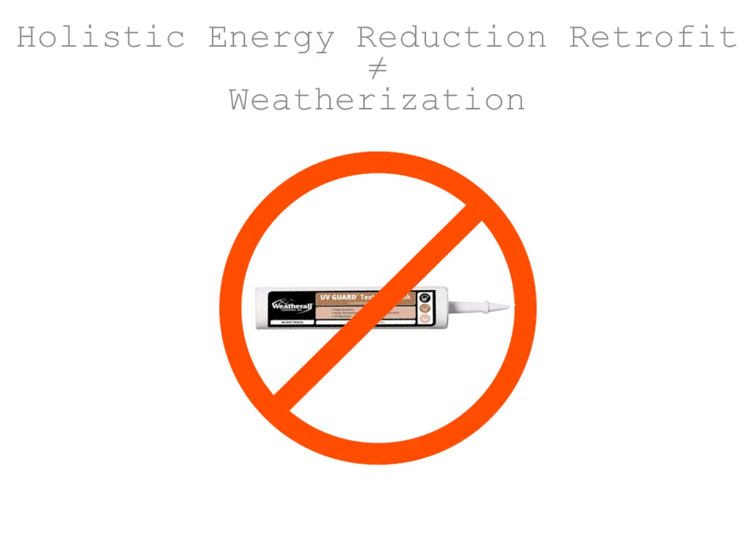And the good news here is that that can actually be done, partially because of the way that buildings are constructed here. Wood construction is great; it can be modified very easily and by just about anybody. So we can do a lot with wood construction.

The other good news is that other people have tried, and there's many concepts out there that you can ladder up to and leverage, passive house being one of them. So this is not out of the question. It's just a matter of whether you choose to do that, and whether you can actually afford to do that.

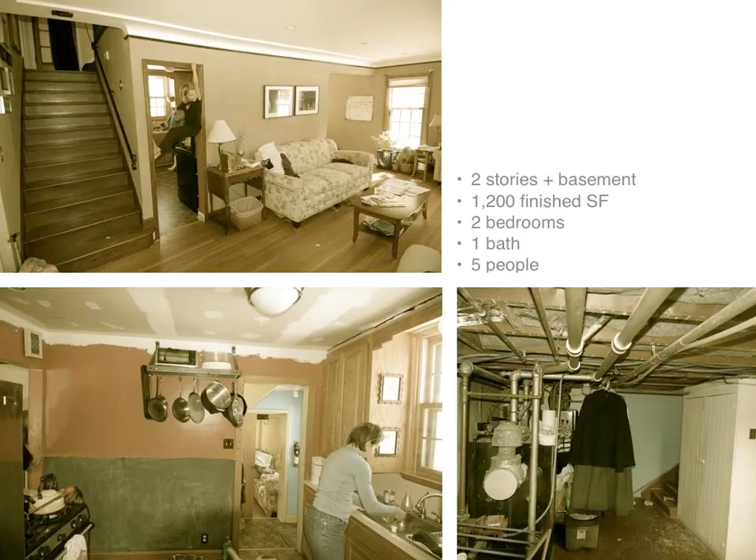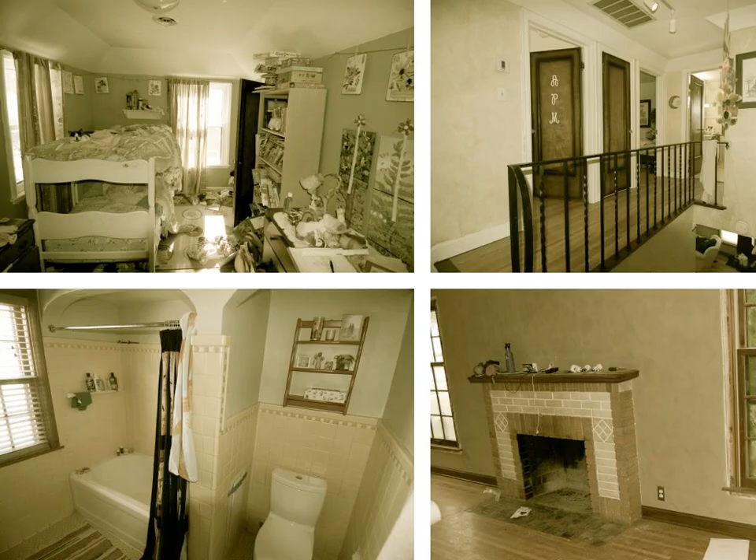You can see in the second slide to the right up above the railing, which doesn't just appear low, it was low. There were many code issues in this building, this being one of them. Standing next to that gave me kind of a buzz. It was about knee high or so. Bathroom, the only bathroom in the house on the 2nd floor, which is a minor inconvenience, I suppose. And also with outside walls. And so that bathroom was not only small and in a bad location, but it was also very, very cold in the winter.

And then the fireplace that I'm showing here is sort of indicative, again, of its age. That would have been maybe used to heat the house at some point. We don't know. At this point, however, it was terribly drafty, going the wrong way, backdrafting. So the whole house reeked of soot. And that was really prevalent depending on changing weather conditions. It would backdraft through that quite a bit. And we blame some of that on the airport noise reduction retrofit the building got in the, I want to say late 80s, maybe 90s, not so sure. That retrofit really produced some bigger problems for this building.

I should say that a retrofit like this was obviously targeting an improvement, so that it would be quieter in the building. What they did when they retrofitted is they added storm windows to the outside, single pane. So the window system was single pane, double hung with single pane storm window. So not necessarily a high performance assembly. And when they put that in, they didn't really worry about air tightness. These IR pictures here really showcase that well. The darker the color, the lower the temperature, and you can see the bypasses and the lack of performance in the glazing.

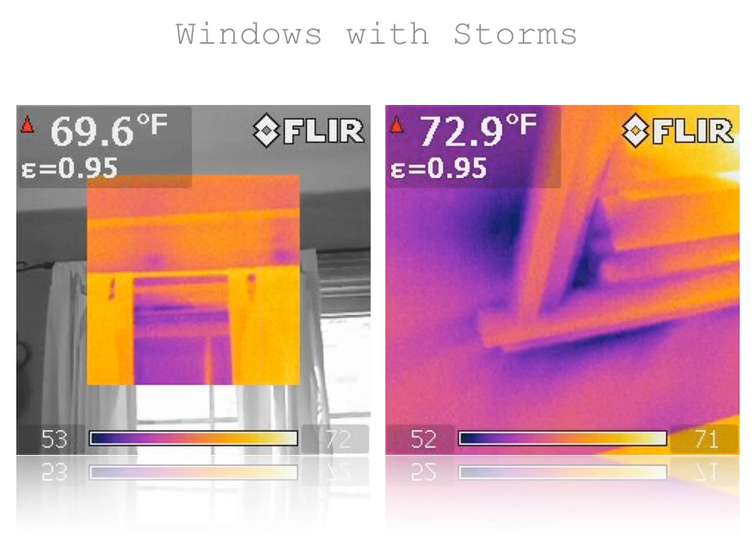The other thing that we found when we went in early is that the interior surface of exterior walls was actually at the freezing point while the house was being heated. So we had about 36-degree wall temperature in a house that's being heated. The mechanical plant had a hard time getting above 64 degrees in that building. That was hard. I don't know that it would have ever gotten up to 70 in there. We tried, and 64 is about as warm as we saw it. The basement air temperature was maybe 50 degrees. And this is all conditioned interior space for people.

We did manage to get a blower door test from this building, and that's where it came in at 8.5 air changes an hour at 50 Pascal, 2100 CFM. For those of you in the trade, that probably means something. It's not as terrible as some buildings we've tested, and that's probably due to the fact that it had the noise pollution retrofit, but it's pretty leaky.

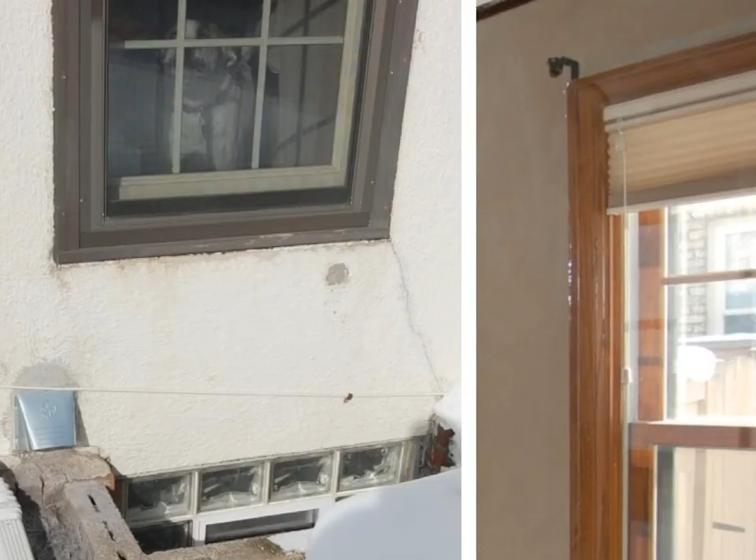And when we go in, not just doctors, but architects too, we deal with pre-existing conditions. We try to scrutinize buildings fairly closely. And so we did the same thing here. And you can see a few of them, some of the highlights. You may notice the dryer vent in this image essentially blowing onto a retaining wall. This by itself is not terrible. It's just not right.

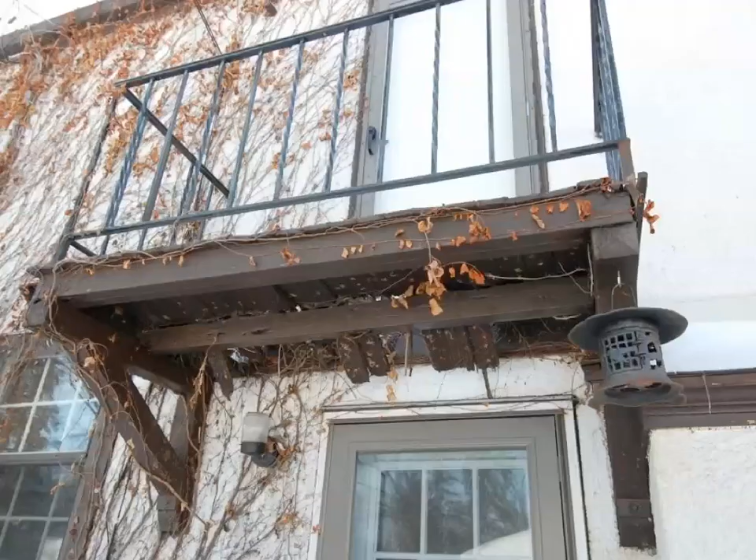You can also see the stucco cracking all around the windows there, and that's indicative, of course, of a weather barrier failing. On the inside, oops, skip the slide here. No, I'm sorry. The right-hand side there, you can see the plastic that people put on the windows, and that's pretty common around here. And there's nothing wrong with that.

But the problem with the window wasn't so much that it was leaking through the window, but it was leaking around the window. So the fact that there was plastic on the window didn't really help because most of the air was leaking around the window and through the window trim. And so this really produced a minor improvement. Here's another image of the second floor balcony, and I think structurally that speaks for itself.

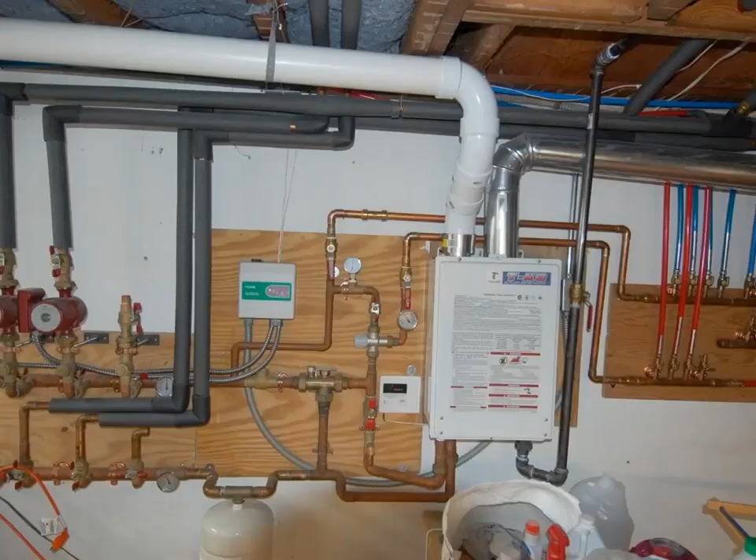Here's the mechanical system, and I have to say this was taken on by the homeowner himself. He put in this new system with an on-demand boiler, and there were some code challenges between this thing heating the home and making hot water, where this wasn't actually a code legal system. I don't know if that had anything to do with the lack of performance, but at the end of the day, it was clear that we would recycle that or change it anyway.

So it wasn't one of our concerns, but mechanical systems we find in these buildings, they vary greatly. This was certainly a newer setup, but that didn't mean that it worked very well. And in some cases, we find very, very old equipment that doesn't work at all.

So at the end of all that, we got to take a tally of where we are. And what we did here is we have sort of a checklist. We like lists. We're German, so that always works for us. We have structure, yes, and the structure held up for all these years. Weather barrier, maybe. Stucco was on there. We had windows that would open and close, but how good they were, who knows.

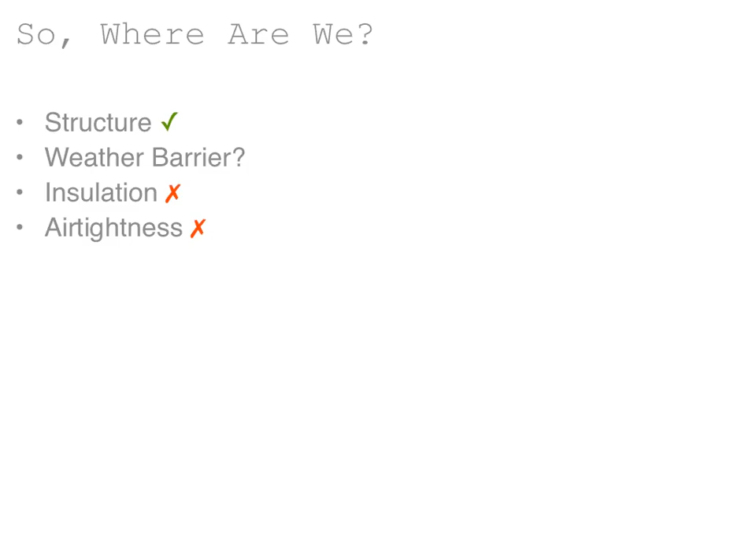Insulation, no. We did find a little bit, I think, in one corner of the house, which was sort of odd. One room was insulated, the rest was not. And then any other insulation in the basement, for instance, was put there by the homeowner just recently. So no insulation. Air tightness, I think at 8.5, it's fair to say there wasn't any air tightness.

Moisture management, well, interestingly enough, in these older structures, that sort of works, right? Because they're leaky, they're drafty, we got wood construction, and so it sits wet, and then it warms up outside eventually, and it can dry out, and if there's no insulation in the cavity, that moisture isn't really being absorbed and stored. So the building held up, no doubt.

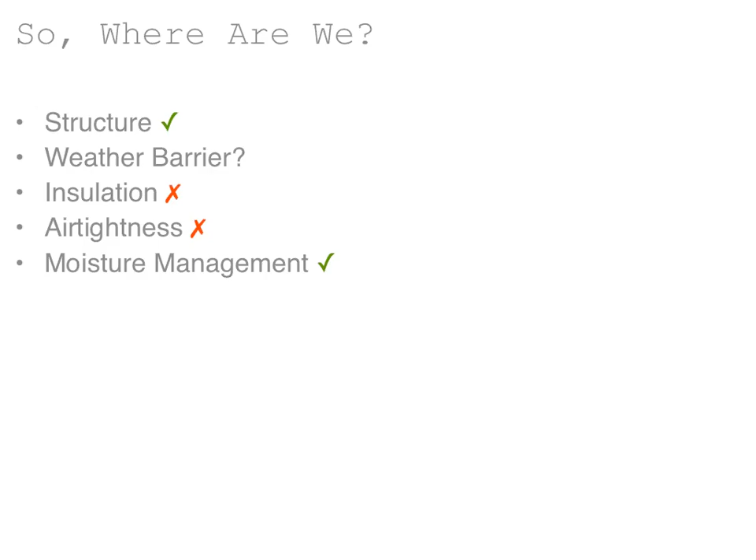'35 to 2010, whatever that is now, so many years it held up. And it didn't fall down, so that worked. And it's beyond its design life, because we assume wood construction is a 30-year life cycle. Ventilation and air quality, not. We had the backdrafting issue I talked about. There were no means of exchanging air in the building, no mechanical system to do that. So that was poor.

Comfort, I gave that a 2 no's, because that was really terrible. I had enough of it after a day of measuring. Daylight, very little, and that is due to the design of the building, really. You saw most of the windows are kind of small, and that's really how they were designed back in the day. So it's not really a flaw, it's just a fact.

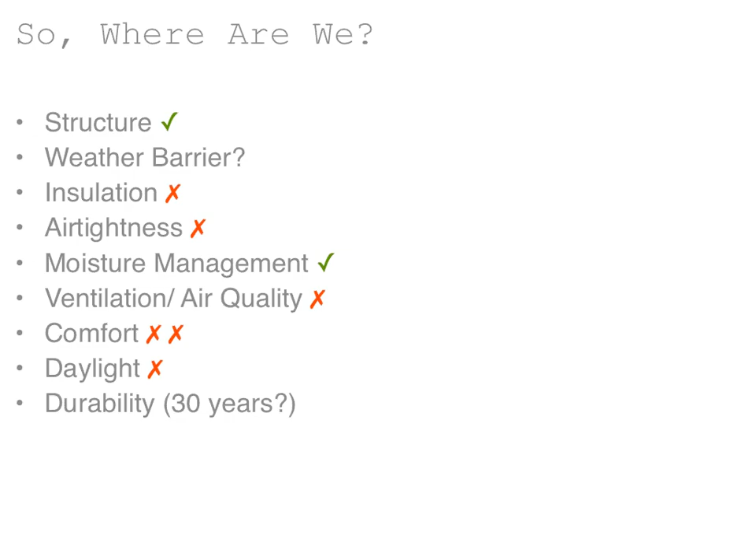No great daylighting. Durability, we assume wood construction is a 30-year product unless you do something special with it. We all recognize these buildings continue to live on way longer than that, but that's because we maintain them and heavily retrofit them every so often. Design was a sign of the times. You can think of that what you want. It is what it is. It fit the neighborhood, and that's okay.

And so then the next question was, now that we know all that, where do we go? What do we do with that information? Here's another list. I think there's 2 more in the slideshow, so bear with me. We call this the laundry list because it could be endless. And we developed this with the homeowners, I should say, too. It's not just us doing our work here, but in this case, the Brazeltons were, of course, heavily involved.

What we needed to find in that building were 3 more bedrooms, 2 more bathrooms, a mudroom, a better kitchen, better living areas, a homeschool room, safe stairs, a weather-tight envelope, a durable structure, healthy interiors, comfort in daylight, low operating cost, and energy performance.

Okay, that was the list that the homeowners brought to us, and we essentially brought back the EnerPHit as a tool to counteract some of the shortcomings here and guarantee a certain level of performance. But everything else you see on that list is really standard architectural practice, trying to find the rooms and improve on some of the conditions. So it's a mixture of both.

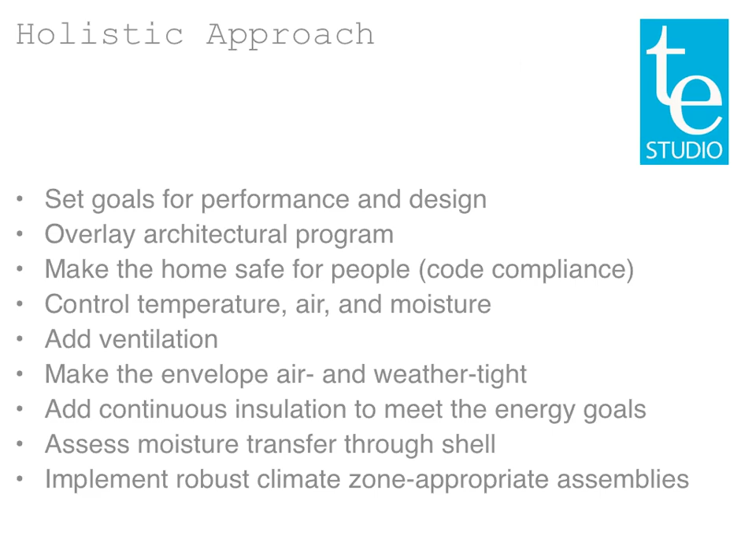And then last but not least, implement robust climate zone appropriate assemblies. So we want to choose materials and systems that we feel will survive the onslaught of what this climate zone here has to offer. And it's one of the more exciting places to build in the world.

So, all right, energy targets, just a simple one here. Reduce loads and air leakage. That's pretty straightforward. We're aiming to reduce the heating load by about 80%. You saw in that little film earlier, if you build a new passive house, it's about a 90% reduction. Again, in a retrofit, they give you a little bit more leeway, so it'll be about 80%.

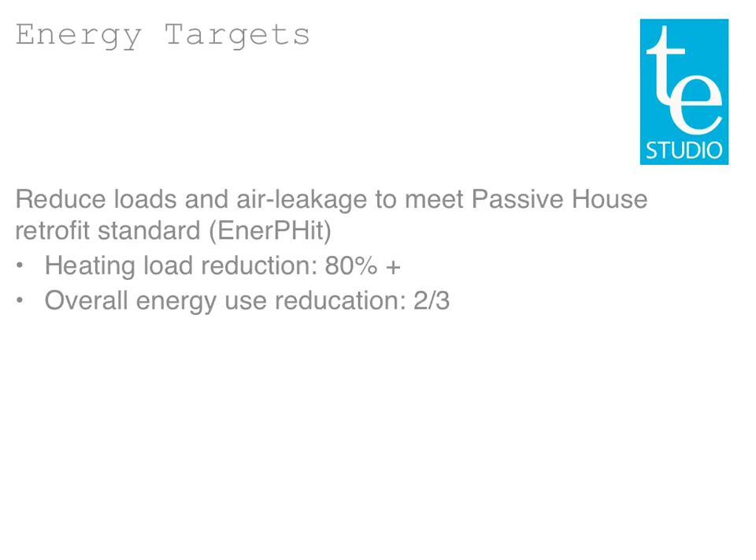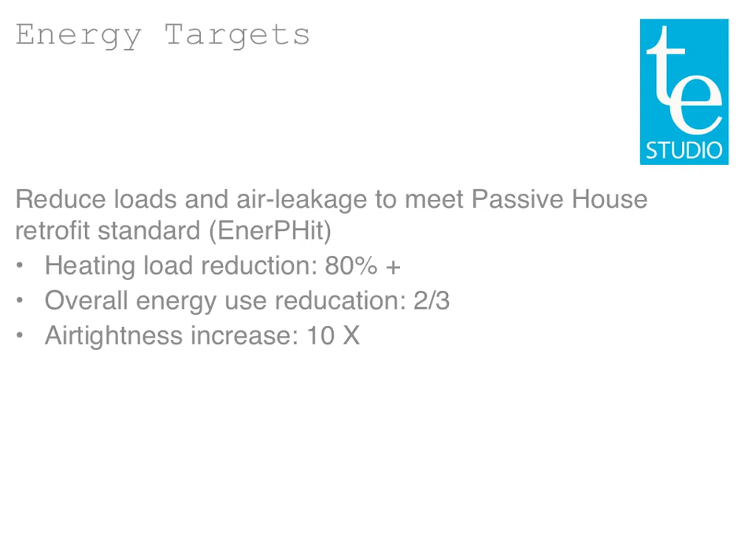Overall energy consumption in the building cut by about 2/3. We can't do that without the help of the homeowner. That's important, because their usage pattern in the building will affect that. But that's usually what a passive house brings. And air tightness in this case, because we knew what it was before and what it needs to be, we needed a 10-fold increase in that. And that's how we did it right there. And we're done.

So, for those of you who live in Minnesota, you wouldn't go outside in the winter with just a t-shirt, right? So you put a heavy coat on. And to everybody, that makes perfect sense. If you go out in the winter, you want to stay warm, you need that heavy coat. And that's really the concept that passive solar design and especially passive house has pioneered over the last 20, 30 years: in those colder climates, put a heavy coat on the building.

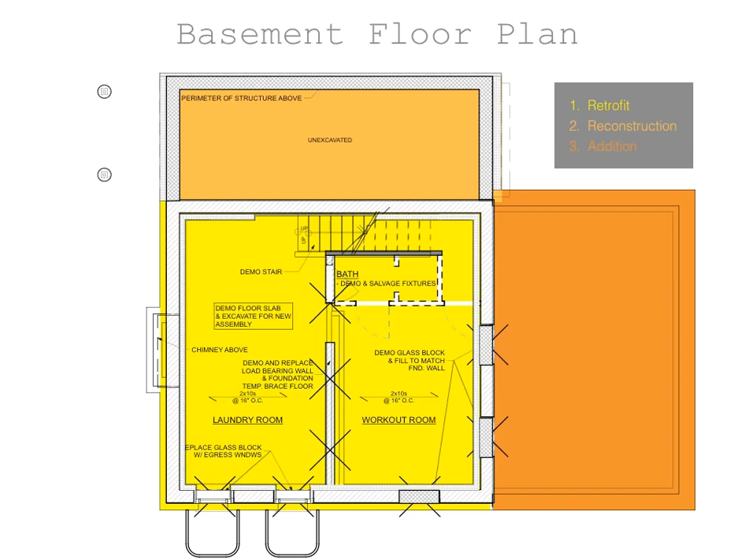And I'll overlay here now how we retrofit it. You can see the main body of the house was retrofit. The north side of the house ended up being what we called reconstruction, and you'll see that in later slides. It was so badly damaged over the years that it had to be rebuilt. And then on the east side, we ended up building an addition because we did need to find a few more square feet. So technically speaking, we have three parts to this project.

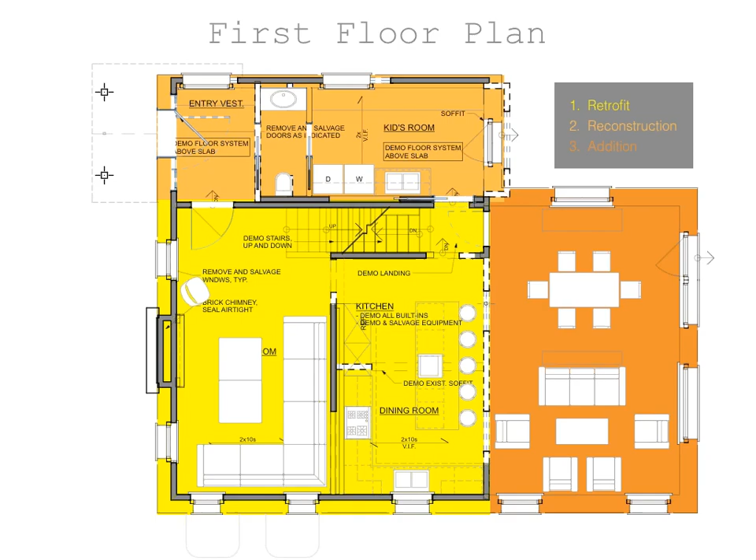I'm not sure that we need to go into every one of them, but in the retrofit area, we reshuffled kitchen, dining, and living. In the reconstruction area, we created a powder bath on the first floor, a good entry, and a mudroom. That used to be a kid's room where it says up there in the corner. It's now a mudroom. And on the addition side, we created an open kitchen and a dining living area.

Here's the final product. This is probably the better slide. So you can see it's an open floor plan, which is what most clients want these days. That has nothing to do with passive house or passive house retrofitting. This is the architectural component here.

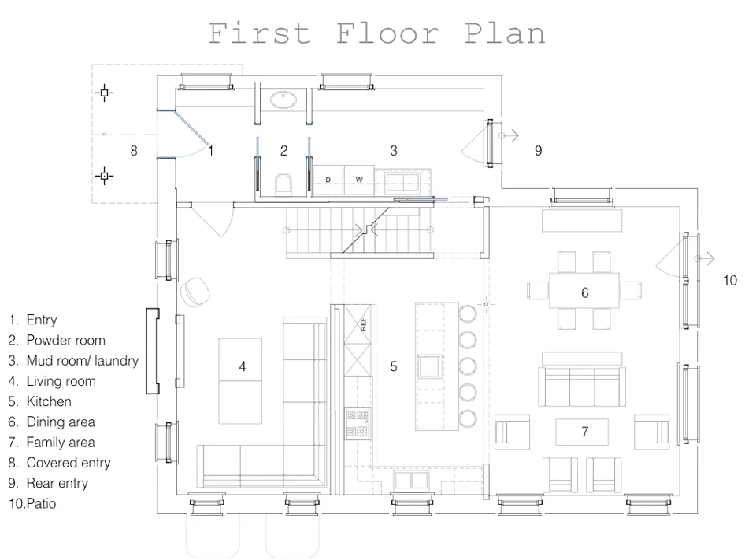The addition had a footprint of a total of 800 square feet on 2 levels, so 400 feet we added on the first floor and the second floor. Second floor plan, you can see there's the 2 bedrooms, the stair in the middle, the single bath, and then the office that I showed you. And the office was sort of almost a half a flight of stairs down.

The stair was really bad, didn't meet code, and the second floor wasn't all on one level, which presented its own challenges in retrofitting. Here's the overlay. Again, retrofit portion, reconstruction portion, and the addition portion. And then I'll jump to the finished product, and you can see we went from 2 bedrooms to now 4 bedrooms on the second floor.

We added a master bathroom in the master suite, your lower right-hand corner, and a little entry area that is sort of a walk-through closet, if you wish. And we expanded on the existing bath and separated out a toilet room. And the hope here was to just give the home better flow. With 3 kids, they can now separate out between toilet and usage of the bathroom. They have 2 vanities in there.

They're all girls. That'll be interesting in a few years, but we'll see how it goes.

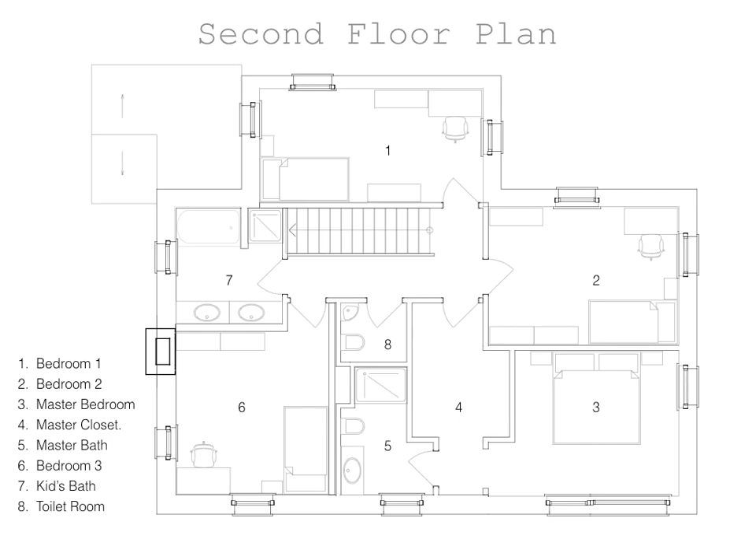So this is the floor plan and footprint that we ended up with. This is our concept sketch that we use when we talk to clients and when we give presentations like the one today. Basically, what we're looking at here is a generic section of a building. This could be any home, really. The part on the right is an illustration of what we normally find. And it's pretty similar to what we found here.

You find below-grade assemblies with no insulation whatsoever, skinny above-grade assemblies with some insulation, and usually there's a little bit in the attic or in the roof up top. But that's pretty common. And then there's a large mechanical system that's trying to make up the difference, because a mechanical system is really an equalizer, right? You're trying to maintain a certain condition, and if you can't maintain it all on its own, then you have to generate that, and that's what that system does.

Now, the change over here to the left-hand side illustrates we're adding to the existing assemblies. We're adding more insulation, all the yellow stuff. You may also notice there's sort of a fine red line in that assembly, and that means we're adding air tightness. There is a distinct layer that we identify somewhere in that system that does nothing but maintain air tightness in the building. And we figure out where that is, and we show it on all the drawings, and we educate everybody on the job site that that's the part of the building that you need to be careful with in execution and not damage.

We bank on a little bit of solar heat gain. Passive house at the core is a solar model. Now in a retrofit, we can't site the building anymore. It's already there. We also can't pick the neighbors. And so it is what it is. But even in a retrofit condition, you can bank on some solar heat gains. So we have that in the mix. We have assemblies that are conducive to it. So the windows we use are high performance products that insulate well, but allow that solar heat gain to come in. And that's the same we used here.

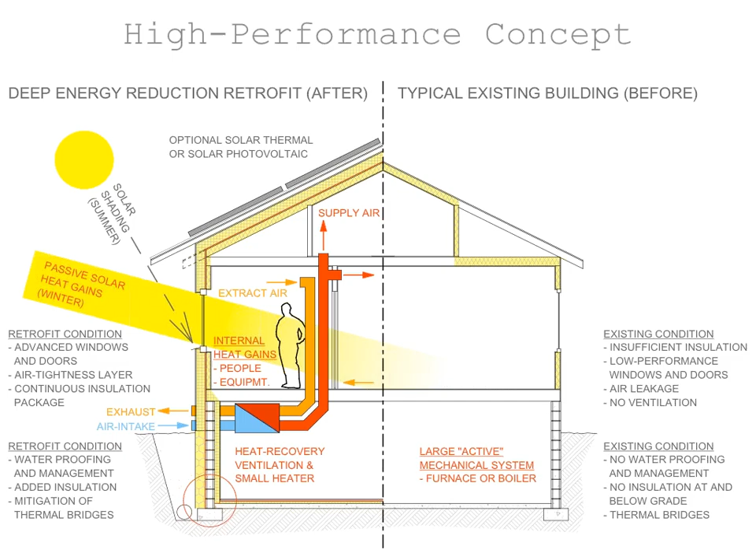These are some of the assemblies that we used. I know these are technical drawings. They don't work for everybody, but you're looking at a horizontal section on your left and a vertical section from basement to the top on the right. The colorless assemblies, or assemblies that don't have a background color, are the ones that were there.

So if you look at the right-hand side, you can see the big concrete basement wall on the bottom there and a footing, and those things were obviously there. And there's a floor system above that was there, and there is a 2x4 wall system above that was there. So everything that has color are things that were added.

In this particular case, we had the added challenge that the roof was structurally not sound, and it also started right on top of the windows. And that presented its own challenges structurally. And pretty early on, we found that that wasn't sustainable. We had to do a new roof.

And we used the opportunity to build the walls up to a regular ceiling height on the second floor, which previously it didn't have. So you can see a little bit of a knee wall basically extruding above the existing wall. It's a truss roof system up there, so that's pretty standard construction. You can just see the higher levels of insulation.

I'll give you a few figures just to put things in perspective. Had we built this to Minnesota building code, below grade or in the ground, the Minnesota code would have required an R value of 10. To make the energy goals here, we're above R30, so about 3 times the insulation value. Above grade, again, code requires about an R19.

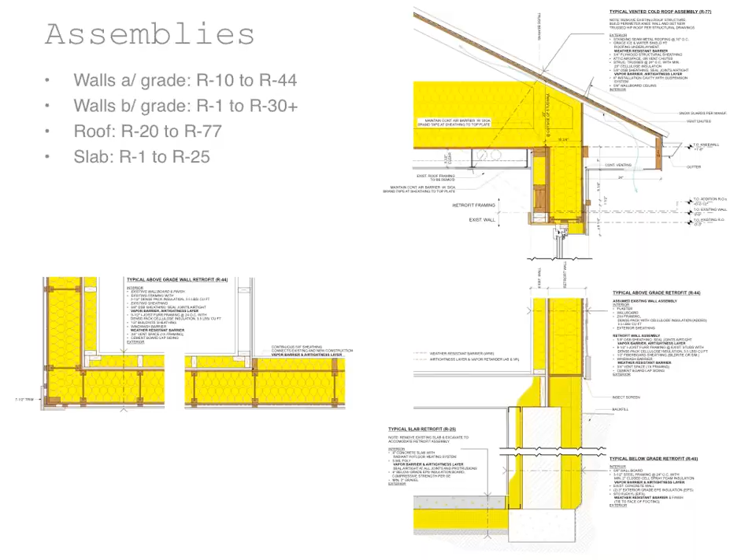And when you're getting into a retrofit like that, and Ryan, who was the builder for this project, is in the room, and he'll join us later for Q&A, this is where the rubber meets the road, in the design and execution of these details. When you want to get to these air tightness levels we talked about, and moisture management and durability, it's critical that these assemblies are designed properly and executed properly. And it takes a very diligent builder to see that through all the way to a successful blower door test, which is one of the main testing methods at the end of construction to see if it all worked.

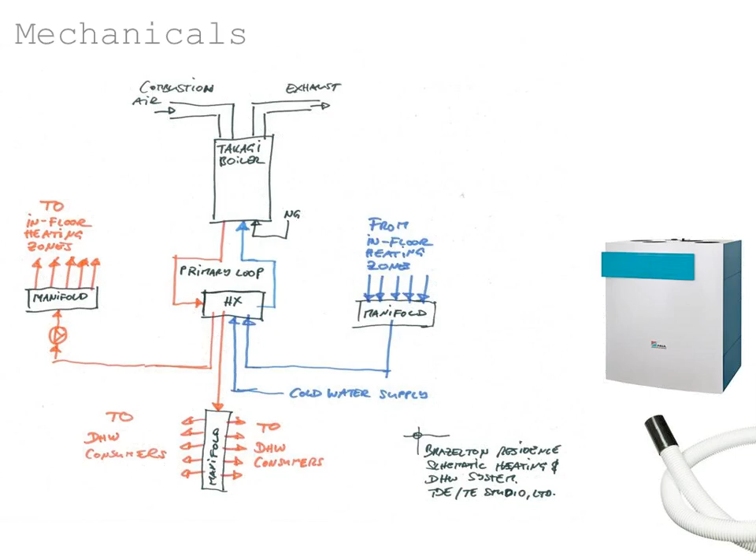And on the right-hand side, you can see the ventilation machine in a schematic and a pipe that we use for ventilation. And we have some of these products here, so we can break them out later and you can touch them and see them. So that in itself really constitutes the extent of the retrofit.

The building was designed, I should say, with a mini split air conditioner in mind. The clients haven't put that in yet, but for the design, it is vital to have it, partially because they didn't shade the windows the way that they maybe should be shaded, so they'll take on a little bit more heat gain.

But also, one of the things that we learned, and this is a good sort of message, I think, for anybody working on passive house projects: if you're dealing with an airtight, highly insulated envelope, you can heat it very effectively with your activities inside. And just like in the movie earlier where the woman said, you know, I can walk up and down the stairs and create heat in the home, it's true. And so if you had a party and you invited a bunch of your best friends and you did some heavy cooking, you will increase the interior temperature in a passive house.

And in this particular building, we were there last week. Ryan was there with us. We did a blower door test. There were about 5 of us in the building. It was all sealed off. It was a warm day. We started at 76 degrees, but inside, by the time we left, it was 78 degrees. So just 5-6 people working inside the building were able to heat it.

So an active cooling source helps you deal with those internal gains when you have those moments where that becomes excessive, but they also help you with heat gain you may take on from the sun. That may seem wasteful, but it really isn't, because in the larger scheme of things, those loads are tiny compared to what we have in heating loads. And again, we're averaging heating and cooling loads. Both of those have to meet the same standard over the course of the year, and that is not a challenge, at least in our climate zone.

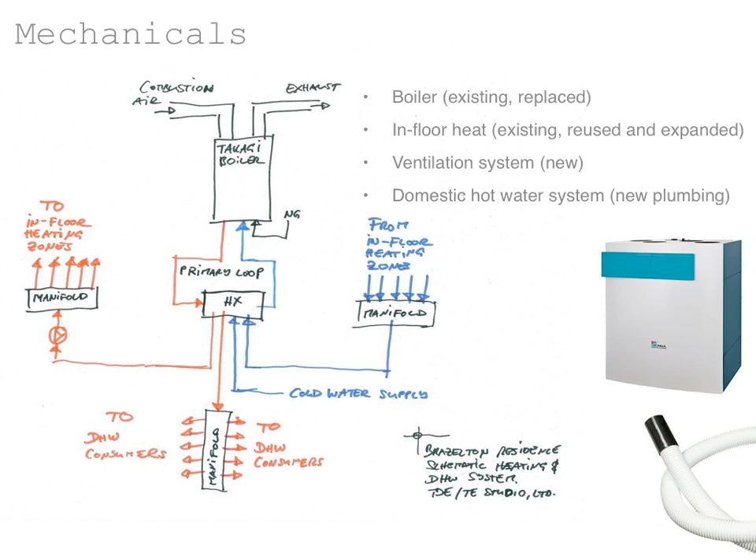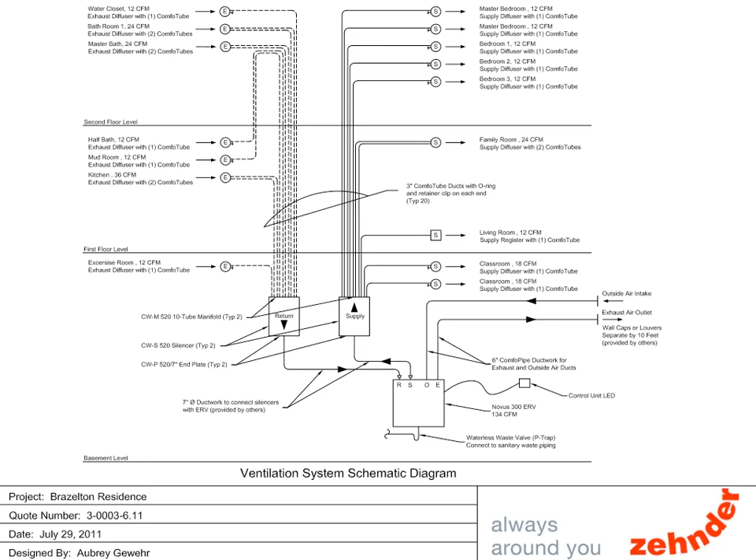All right, so let's have some fun with it. That's great. Who said oh?

So when you dig into an older building, it's the proverbial can of worms, obviously, and so was this one. This was no different. So what we found was the chimney that gave the home a lot of character was actually highly unstable. Part of it had already collapsed inside, and that was maybe also a part of why it backdrafted, because there were bypasses. I don't know. So it ended up coming off the building.

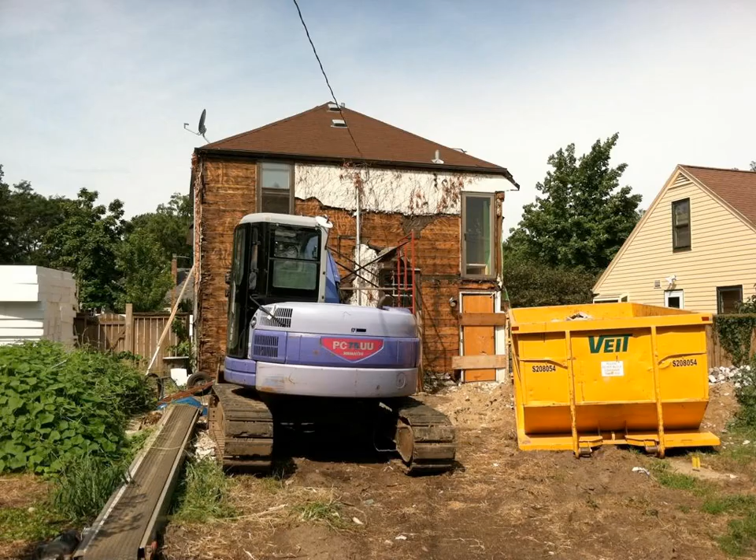And before we get too far into this, I have to say that a lot of credit on this really goes to not just Ryan, who's with us here, who's a contractor, but especially the homeowners. Desiree and Paul Brazelton, they did a lot of this work themselves. And I know they had help from family and sometimes neighbors, and I don't know, maybe even random passersby.

I think this job was much more monumental than they had ever imagined. And just picking the stucco off the house, I think they had this fantasy of you hit it with a hammer and it falls off. And I think it came off in dime-sized pieces in reality. So that was a very different equation.

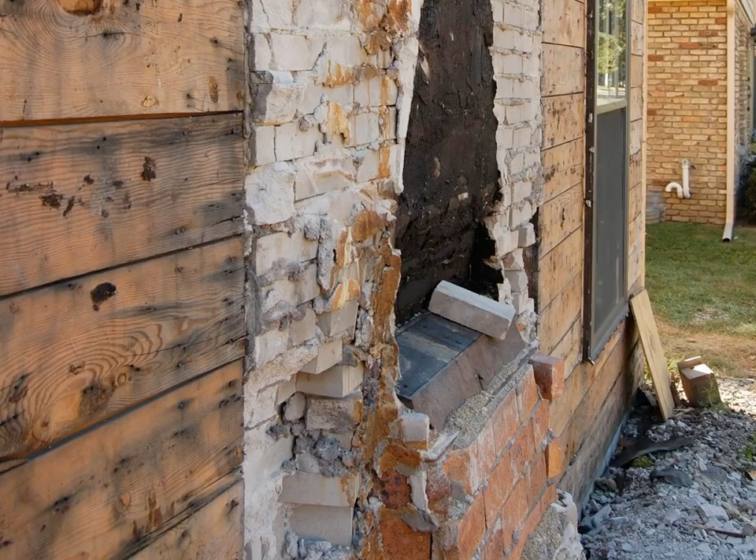Here's another close-up of the chimney. And at the end of the day, what we ended up doing is we basically layered our air tightness layer all the way across the chimney. And the chimney that you saw in the rendering before and that you'll see in the final product is completely fake. And its only purpose in life is to give that home street appeal. That's it. So keep that in mind. That home no longer has a functioning fireplace.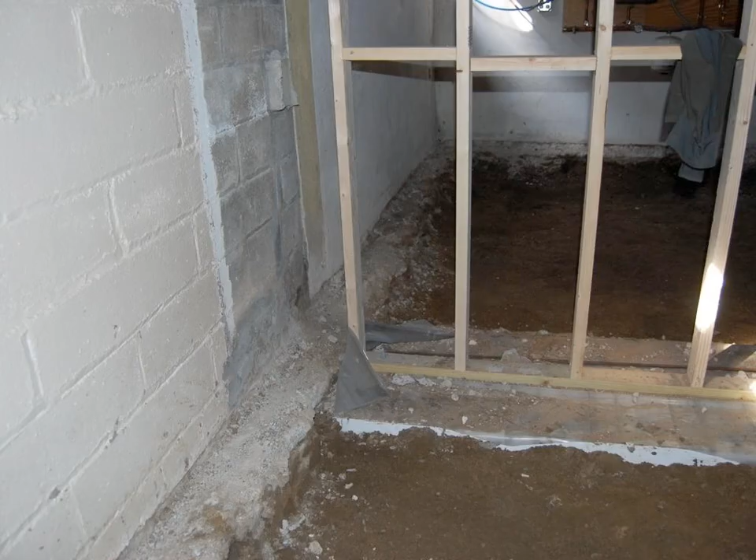I'll show you a couple of shots here of the basement and how the retrofit in the basement worked. I don't have any of the real good action pictures, so I should ask for those. But in this picture, the slab down below is already gone. So you never quite know with these older homes if they have footings, what's happening at the slab. And we identified that by busting a couple of holes.

And one of the things that we identified with the homeowner is we really need that square footage down there. They needed that space desperately. So early on, we made the decision, this is now inside of the conditioned building envelope. And what that means is it needs the same insulation levels really as everything else. And so the first order of events here was to eliminate the basement slab.

Now, a lot of these older slabs are not very thick, and I'm not sure how bad this one was to get out. But that's usually something that can get done quickly, especially if you have access to the outside, a conveyor belt or something to get rid of the garbage. I don't know that was possible here. I remember people bringing buckets up and down a ladder, which I'm sure was great fun.

Yeah. We found another opportunity here. We actually found the homeowners a few square feet. You can see that framing in the middle here, and that's the center load-bearing wall. That used to be a concrete wall. Now, there were two problems with that. It was sitting on the slab, which needed to go, and it sucked up a lot of space. And so that would have presented a significant thermal bridge had we left it in place.

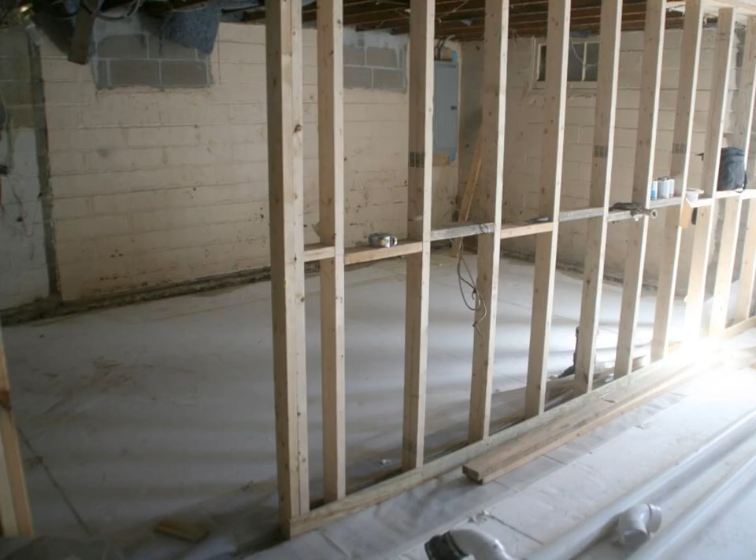And then in the next stage here, you can see how on either side of it, now the ground is being excavated and replaced with foam. The white stuff on the upper side here is EPS foam. So we're basically replacing dirt with insulation. Here's another slide, sort of a progress now. Now the entire surface is filled in, side to side, wall to wall.

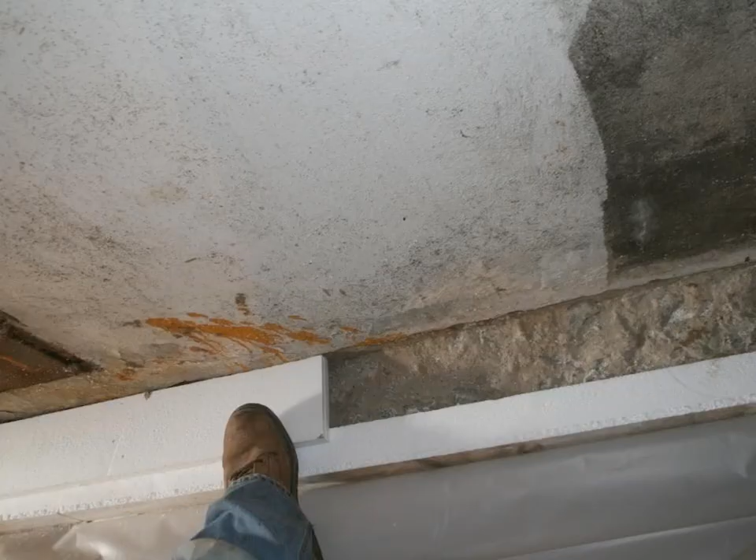Then we have air tightness that we need to maintain. So we introduce a poly membrane in this particular case. And we were also going to heat the slab just like all the other floors in the house. So you can see the heating pipes. And at the foundation, and at the perimeter, we had to get really fancy with smaller pieces of insulation to essentially encase the footing itself and disconnect it thermally from the new slab. And that's what that looks like.

And at some point, you end up with skinnier pieces of insulation. But again, it's a retrofit. We're not building this from scratch, so we have to make do with the room we have. All walls were insulated on the interior. So that insulation that I think Ryan's foot is on right now there is essentially connecting to the wall insulation later.

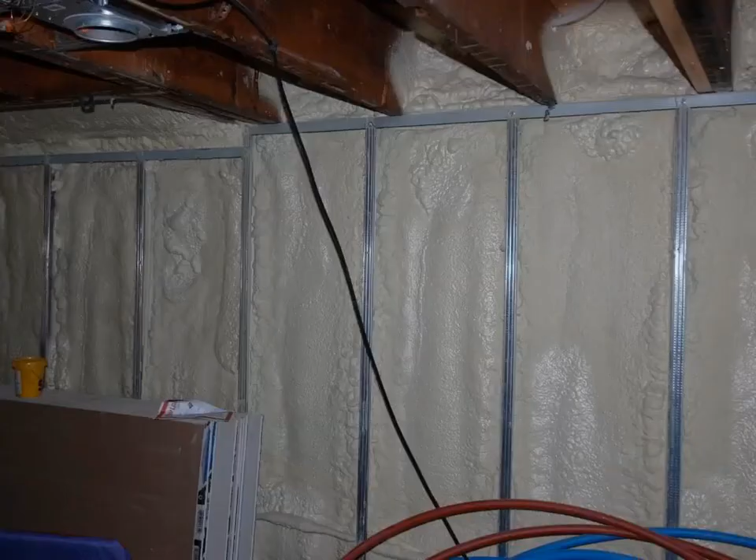So we do have now continuous insulation from below the slab all the way up the side walls. This is what it looked like once the secondary stud wall was placed and the walls were foamed. We try to not use too much spray foam because it's a crude oil-based product and it creates a composite where, in a paradigm where you think about this home coming down at some point, it's going to be tough to recycle these bits. But it is a lifesaver in some conditions like this one where you're simply out of options. If you want to do it in a tight space, and you still need a place to hang your sheetrock, this combination here was very effective to get us high R value in only about 5 inches.

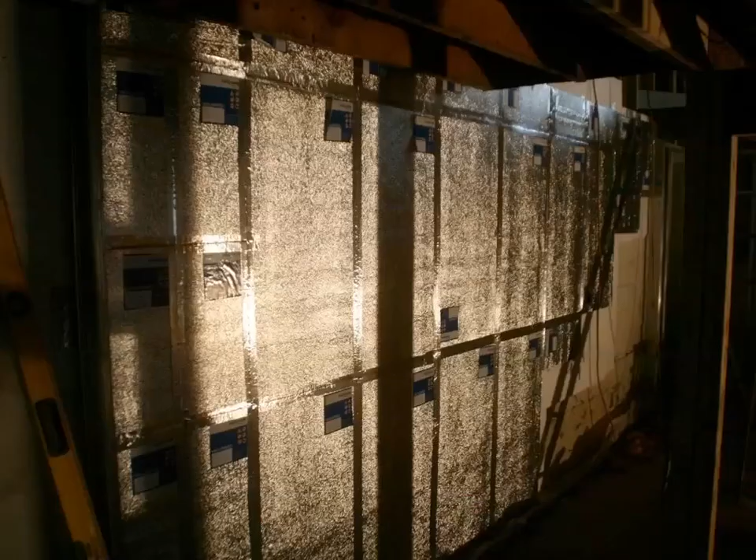This is something exciting. You don't see this very often. This is vacuum insulated panel insulation. It's a product that came out of industrial processes, and it delivers an R value of 30 for 1 inch of thickness, which is about 5 times more than the best spray foam insulation out there today. This is a product that we use when we're absolutely out of other ideas.

Like this one, we had an existing stairwell with a stair being barely wide enough to meet code. So furring in our walls, adding more insulation was not an option. We needed to get the R value in virtually no space at all. And so we used this material in a small area application here and provided a continuous about 30 R value even across this area where we had no space. We sometimes use it behind shading devices or in areas where walls are diminished in depth for whatever reason. It's readily available in the marketplace, and we're grateful for that. So we have some high tech here, but that's about as high tech as it gets.

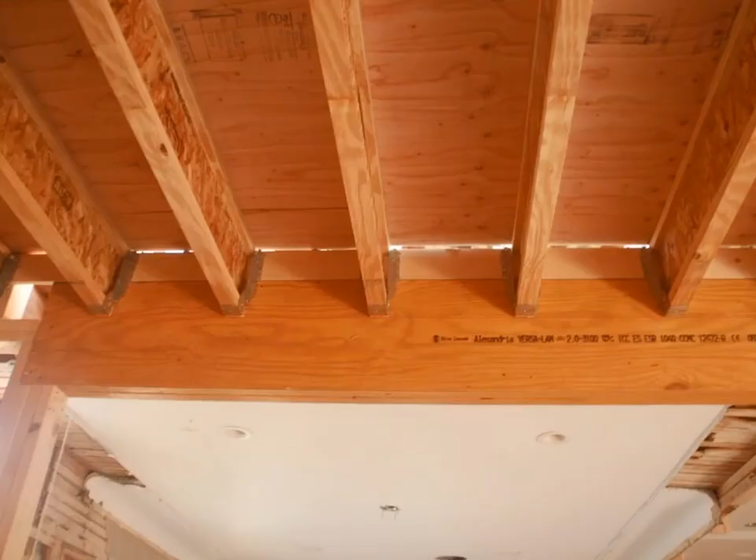Here's a sort of interior framing condition showing some of the new framing of the addition in the ceiling and an old ceiling still hanging on the inside of the building. And what I'd like to illustrate with these slides really is the redundancy, but also the flexibility of wood structures. And I said that earlier. You can do almost anything with a wood structure because you can just hack into it and you can sister on, you can hang from and ledger off and cantilever. And a lot of that was done here as well to create the new floor plan layout and create the assemblies that we wanted to create. So that's really what you're looking at when you see these slides.

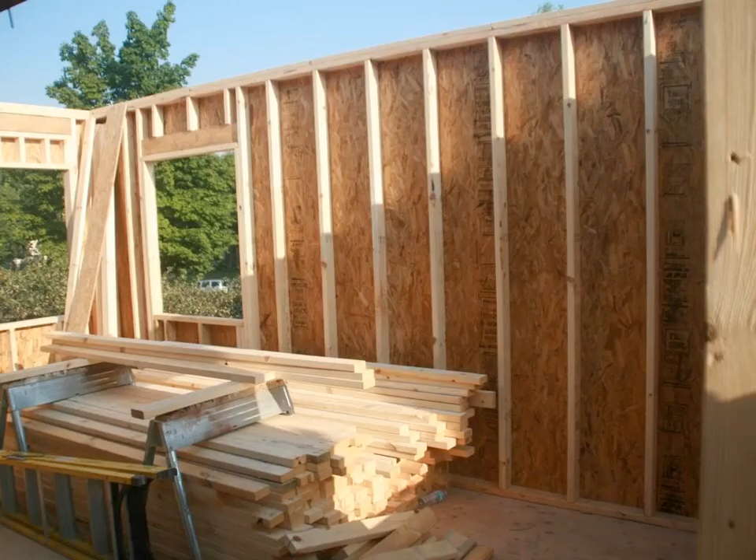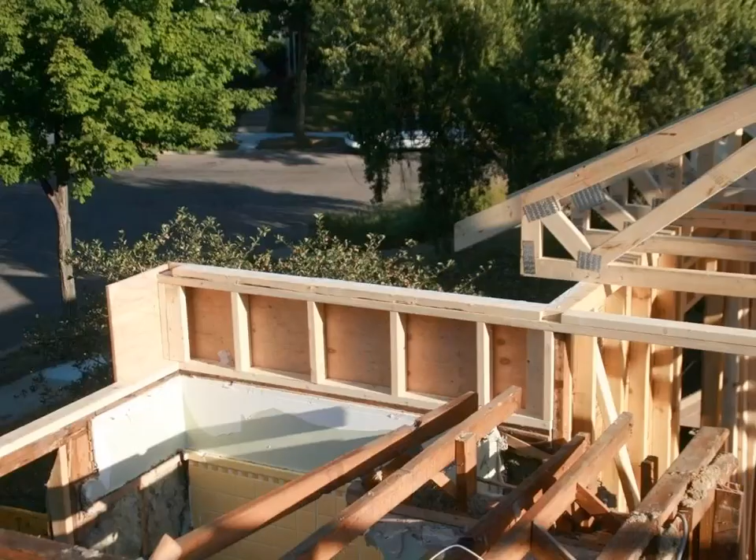I told you earlier that we added to the existing walls to generate some height. So that little knee wall you see on the left-hand side is what that looks like. And again, it's standard framing. And I just like these pictures again because you can see some of the old and some of the new coming together. It's like a puzzle. Here you can see the original sheathing of the building was lapboard.

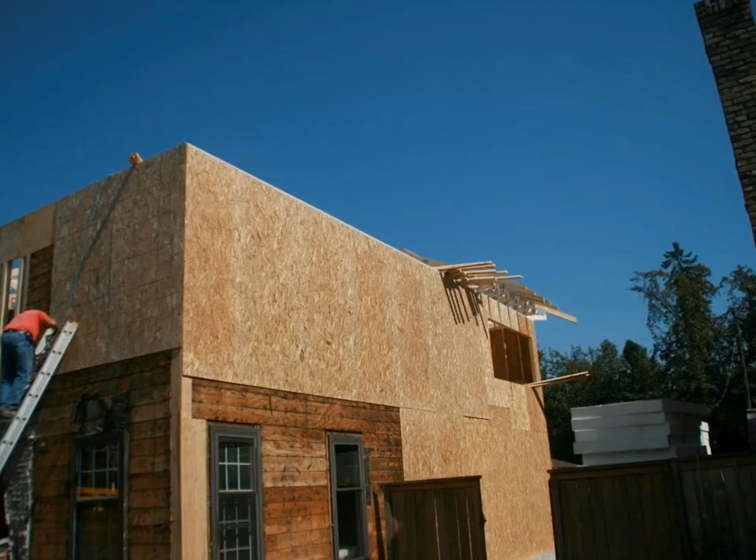And at the corners where it rotted out, the builders decided to rebuild some of the corners just to give it strength. And you can see from the rear of the building, working their way forward here, they're setting the OSB for air tightness and vapor management, and they're setting the trusses on top of the roof. And this is just sort of a progression here of that all coming together.

Now we're looking at the front facade of the building. And this is a stage where the envelope, at least the airtight envelope, is almost complete at this point, and the roof is completely set. So at this point, it's almost a traditional building with a traditional truss system on top of it. In normal construction, people would side over this, insulate the cavities, and walk away. So to this point, we've essentially made something anybody can make.

Quick question here. Can you go back 4 slides to the trusses and emphasize the raised heel truss? Yes. So the question, I'll repeat that for the webinar, was, can I emphasize the raised heel truss? I'll point to that here in the office because I can. This bit right there. It offers a certain height, and that height is needed for the amount of insulation that's going in the roof later. So in standard construction, the top member and the bottom member may have timed out at that point, and here there's an actual height there just to get enough insulation in there.

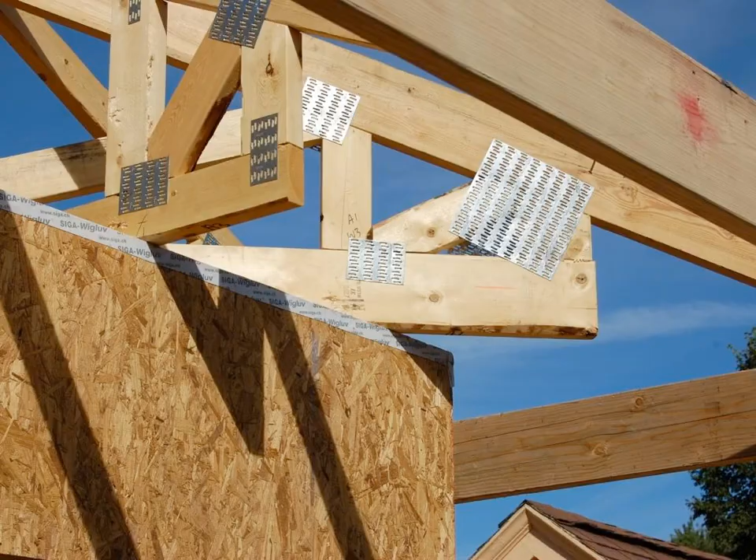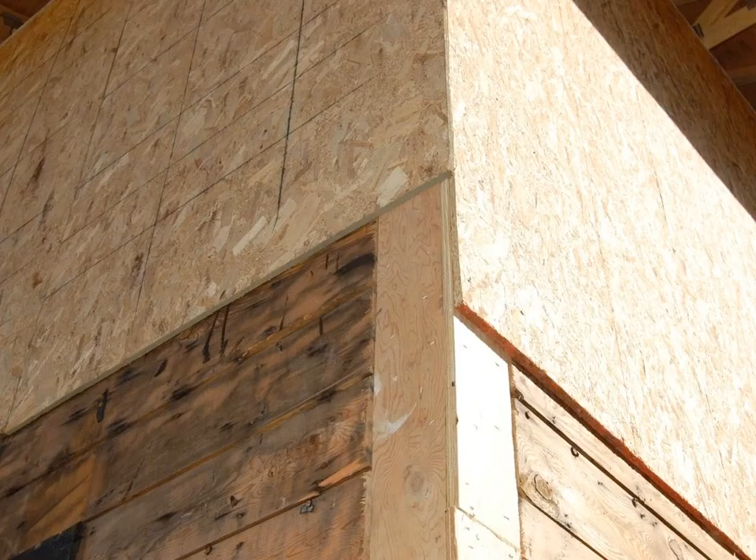Thank you for that. This is another picture to illustrate that, but the other piece it illustrates is we essentially hung the back end of the roof trusses over the structure itself into the plane of the new fir framing. So once we puff out the walls with more framing, everything times out and can be sheathed up and closed in. So in the design, we already accounted for the new thickness of the walls. You can see the roof sheathing going on here. Here's another corner picture of the OSB coming together.

Again, another picture showing old and new, and you can see there's basically all stages of construction happening at the same time. There's still old on the left and probably some demo to do. There's some old insulation left, and there's new construction on the right. And that would be pretty typical for this kind of thing. You're weaving it in. This is how we covered over the chimney. I said that earlier. Our air tightness layer was eventually 100% completed over that chimney so that it no longer presents a liability to the building envelope.

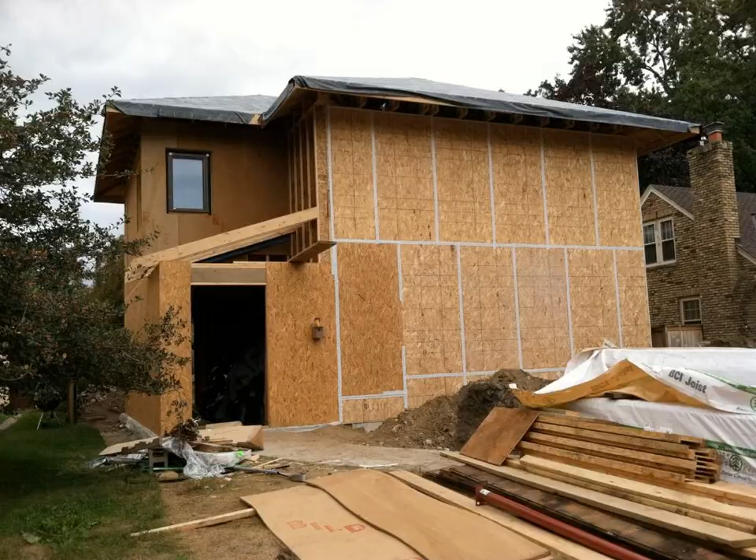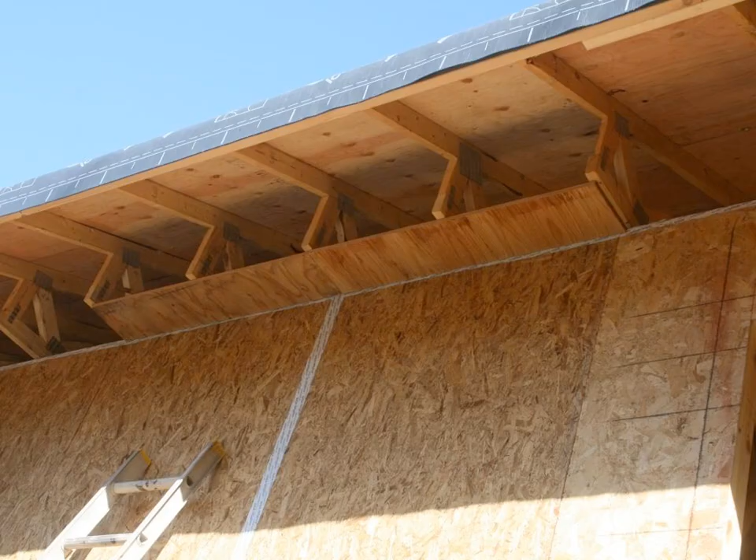This picture illustrates the air tightness with tape. We used tapes in this particular instance. So all the seams on the OSB were taped, and the OSB itself was taped and sealed to structural members at the bottom and the top. So with that, now we have an airtight enclosure. Here you can see buildup starting to happen on the sides of the building. A little bit of new construction happening.

And as we look down toward the ground, we dug out the sides that we had access to and insulated the basement from the outside as well. We sort of created an insulated concrete form, if you want. You can build these new from scratch that way, but we recreated that here. And in the area of the rim joist, we ended up doubling up on the foam to get extra R-value in that zone.

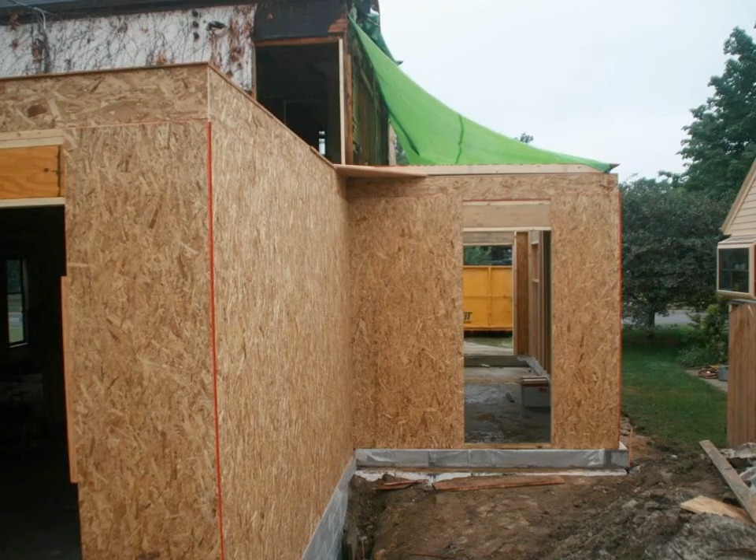Quick question. Going back one, how is air tightness achieved at the top of the wall to the bottom of the truss? Yeah, the question was, how is the air tightness achieved at the top of the wall and to the trusses? I'm not sure if we have a slide showing that exact detail, but we essentially air tightened to the top plate. And on the inside, we have another layer of OSB, a ceiling of OSB in the building that is also sealed to the top plate. So that's where it's continuous. I think there's maybe a slide where I can point that out again.

On this EPS insulation you're using on the foundation, did you consider the water absorption? Yeah, EPS is essentially inert once it's in the ground, and it doesn't really produce a liability as long as it's covered. And this is going to be covered, you'll see that in a little bit here, with a waterproofing material all the way around. Might be worth mentioning too, that same geofoam product, they're using it for highway fill now, so it's designed to be underground. Correct, and I'll just repeat that. Does it absorb water though, and was there a reason why you wouldn't use extruded?

Environmental impact. The question was, why would we not use extruded polystyrene? And it's mostly environmental impact on the fabrication side of it. And as Ryan pointed out, this is geofoam, so it's a product designed to work in the ground. This is typically used for bridge construction, airport runways, things like that.

Yep, you can see the rim area again once it's insulated here, so layers of foam covering that very effectively. The rim usually in wood construction produces a liability, and we've sort of squashed that here by covering and overbuilding it entirely. The building was then furred out. You can see that here starting in this image with I-joists. In this case, it's a 9.5-inch I-joist cavity.

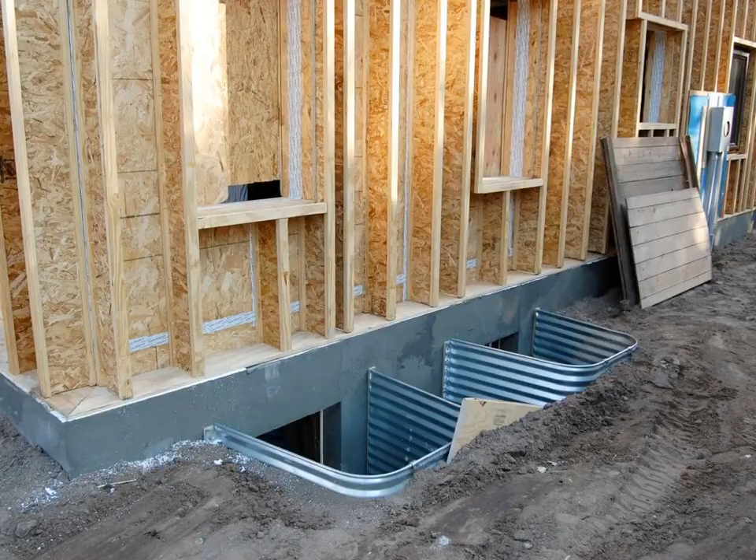Here's another shot of that, and you can actually see the waterproofing now on the EPS system, and that was connected at the bottom and at the top. So that's in place. There's a couple of window wells on the south side.

We have a question, yes? On the existing, what I assume is a 2x4 wall, when you put your new windows and put this weight on it, what modifications do you need to make to the wall? Yep. So the question was, what modifications were made to the original 2x4 load-bearing wall to allow for all this other work to happen for windows to get inserted and things like that? And the short answer is none.

There's very little impact of what happens in that exterior cavity on the existing building itself. The improvements that were made, of course, is rectifying any framing errors or problems that were there. So if a trimmer or header was missing, or king stud or something like that, those things were repaired to make the building structurally sound. But beyond that, there wasn't any other requirement for that system. Yeah.

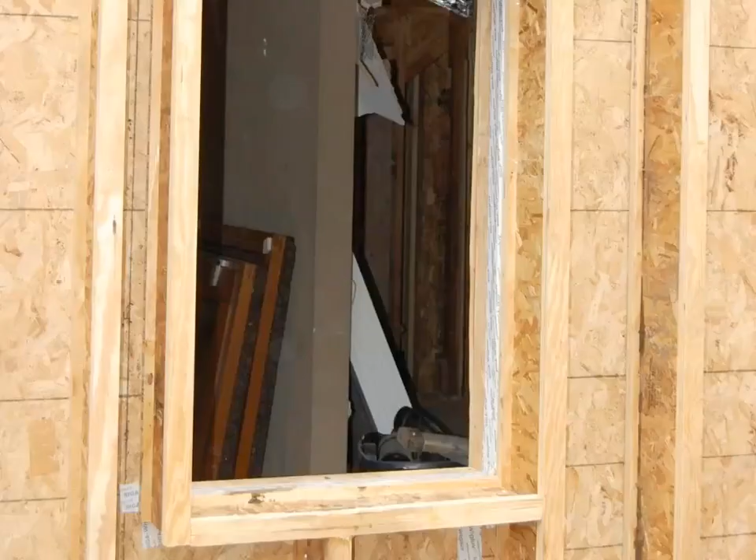Here's a shot of a window cavity. We used the same I-joists around the window opening to create essentially a buck condition. For those of you who are builders who know what that means, but essentially we needed to create a surface all the way around the opening where the window could actually be nailed, or in this case, screwed to.

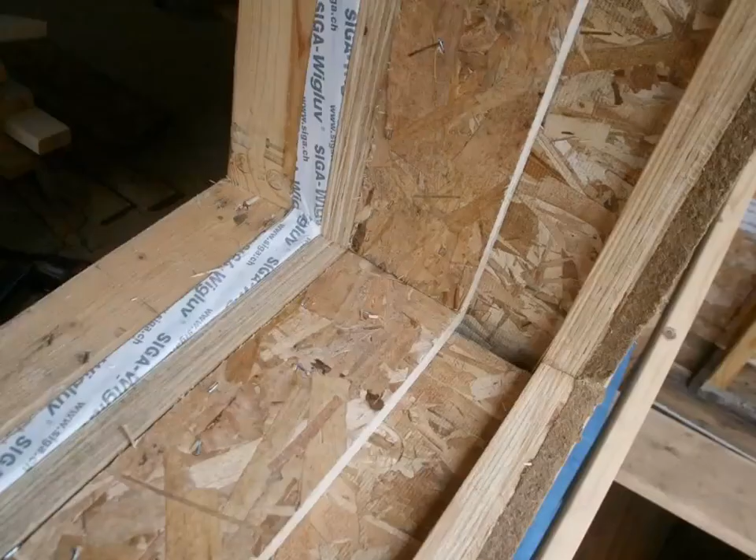Here's a close-up, and from left to right, you're looking at the 2x4. You can see the Siga Wigluv tape there, which is taping the air tightness and vapor retarder layer to the window opening itself. You can see the I-joist now next, and the I-joist was actually infilled partially with OSB sheet good, and we did that to create a point where the window could be inserted

so that it's clear where the window sits. It basically denotes the exact location of the window, and that additional OSB made the web of the TJI stronger to give it more meat to fasten the window to. So in that first part of the I-joist where you're looking at that second layer of OSB, that's where the window was inserted in that particular zone.

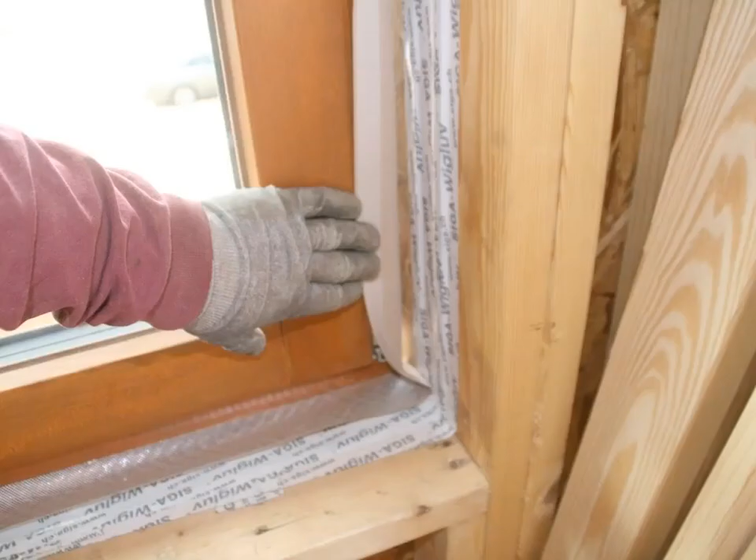And then going toward the outside, you're looking at the second flange of the I-joist, you're looking at build-right building sheathing, and then building paper and ventilated siding. Here's just another shot from a different angle. And here you can see how the windows were taped to the window opening.

Once the window is taped to that opening, we now have continuous air tightness from the window to the rough opening and from the rough opening to the building sheathing. So we've completed the air tightness layer all the way from the window frame onto the building envelope itself. Here's another shot of that.

Here's just a view of a window from the inside in a wall, and then you can see the same thing on the outside. Now these windows are placed about, I would say 50-50, or maybe it's 60-40 in that wall cavity. They're about at the thermal center of the wall, and that makes sense.

If you put them on the outside, at least in our climate zone, you expose them to colder temperatures and you risk condensation points. Also, it's inside of the weather plane. So it's not subject to the same onslaught of what you would find in a nailing flange window application.

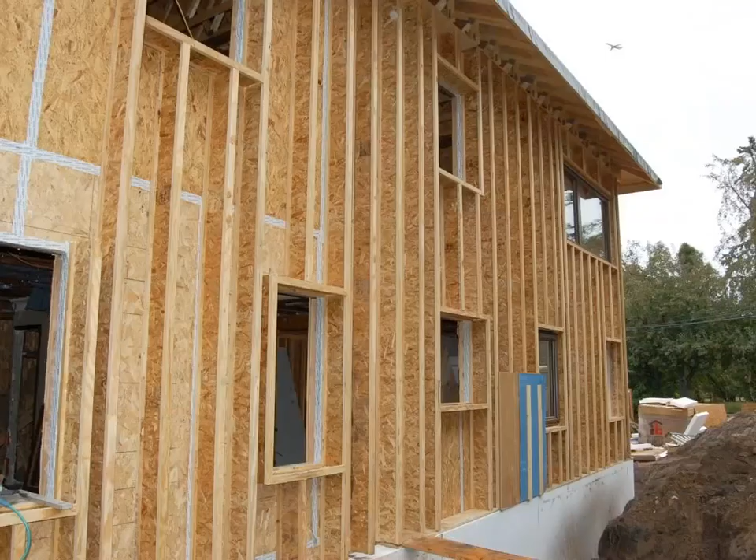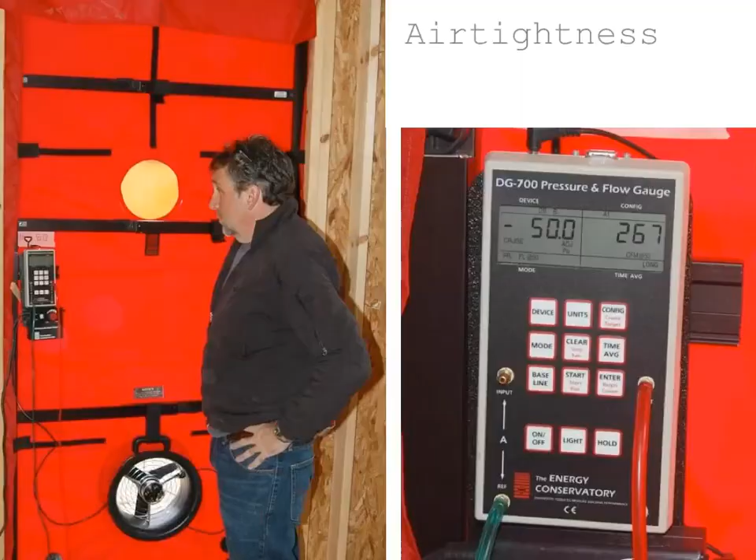Just a couple more images here showcasing the furred out building. At this stage, we went in with a blower door for the first time and we tested. The airtight envelope was now established. All the connections were made. All the openings were filled. So we could bring in our friends from the blower door company.

And they brought the right door. We've seen other projects where that wasn't the case. Please note the small blower fan. And so on this particular project, in this instance, rough-in only, we were able to achieve 0.87 air changes per hour. There it is, 267 CFM, and that compares to the 2100 when we started and 8.5.

So we're at about that tenfold reduction already, and we're within the 1.0 limit of what the standard tells us where we should be. So this was a very happy day for everybody involved. It was a very exciting day, and for those of you involved in these projects, bring everybody out there on that day. There's a lot to be learned.

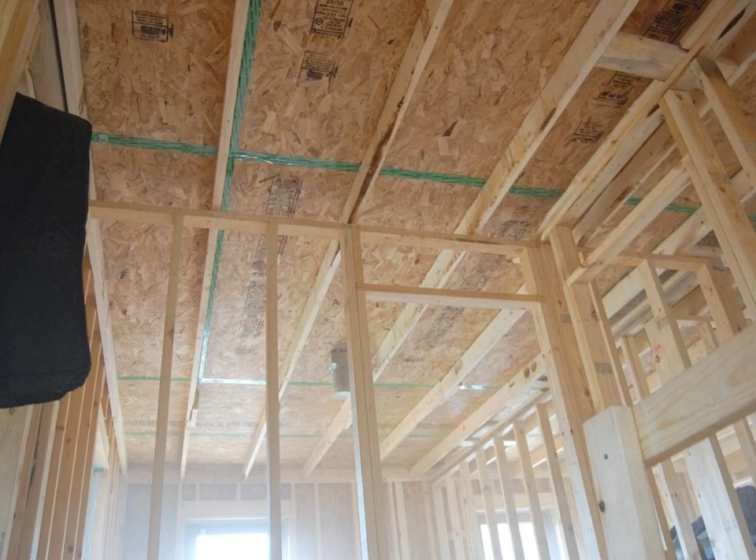A couple of images from that day. We ended up using a smoke machine, and you can see it's a little hazy in this picture here, to look for leaks. Even at 267 CFM, we're still looking for leaks because there may still be some that we can do away with. This image actually shows what I was talking about earlier, the ceiling.

If you remember, we have roof trusses up at the very top, and we sheathed the roof truss on the underside with OSB, just like we did the wall. And we taped that OSB. That's the green tape that you're looking at in this image. And then we furred the actual ceiling down with a 2x6.

And the reason why we did that is to create a cavity for lights, for electrical, for ventilation equipment, and things like that. So we created an installation cavity in the ceiling, if you want. And we have a continuous air and vapor management barrier that is up above and away from that. And we have that in the wall and in the ceiling.

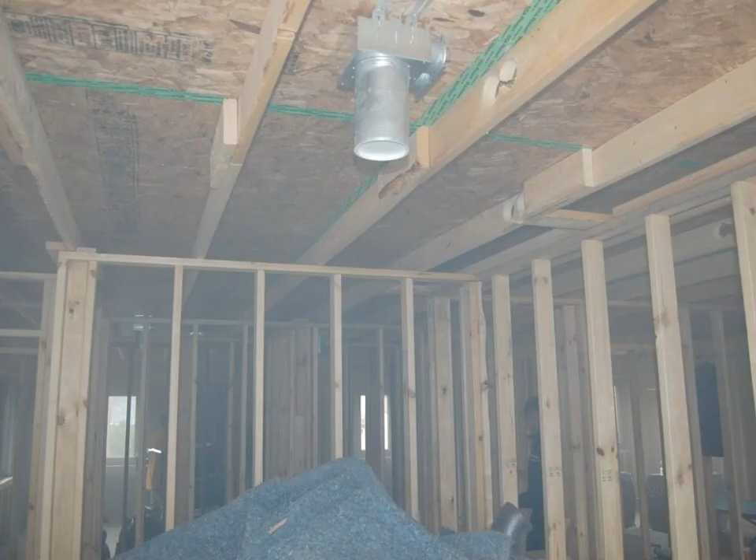We pressurized the building, and then we used the theater smoke machine, and we were simply looking for that smoke to disappear or come out on the other side. And that's how you look for holes, so no rocket science here. And on a good day, you'll end up with a building full of smoke, and that tells you you've made an airtight building envelope. And I will say thank you to Ryan and Paul for making it that. It was exciting.

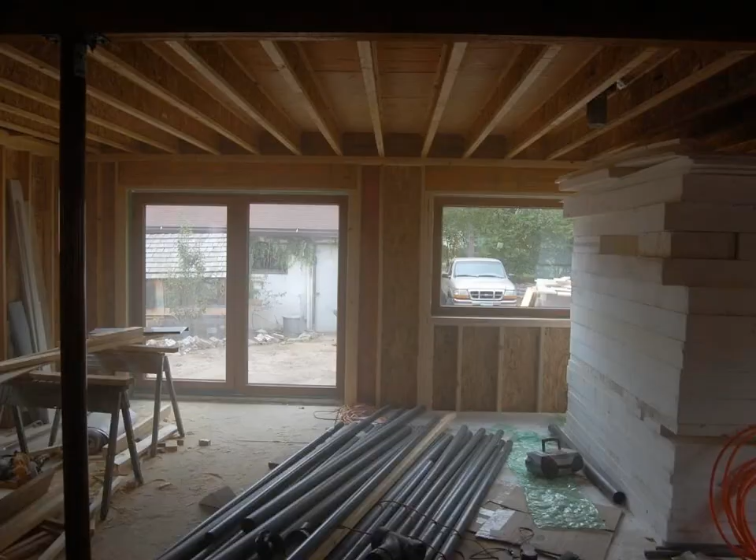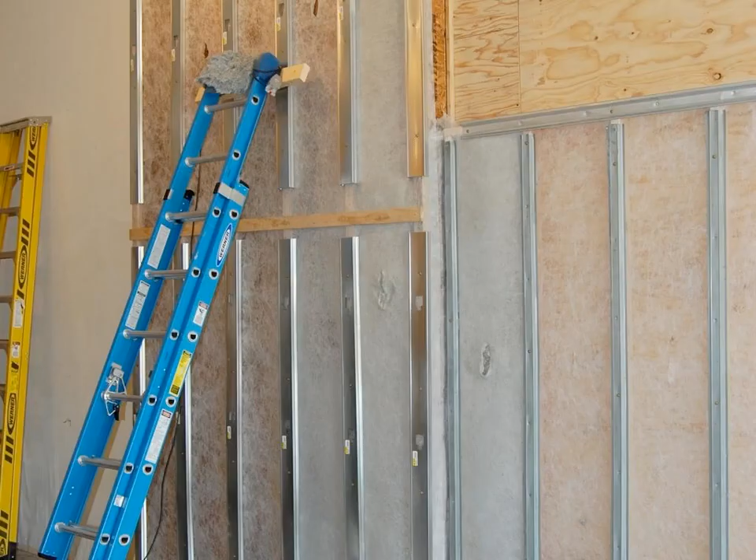Here's another impression of the addition, first floor addition. This is the future dining and living area. And on the right-hand side, you get a little impression of the stacks of foam that were used below grade. This is a shot that was taken in Arnie's shop, and Arnie's here today. He was the insulator on the project, and here's a nice picture of him. He was kind enough to mock up the wall system for us in his shop.

When we started, there were some doubts and some questions on, can you actually dense pack a cavity of that size? And dense packing means we have to push enough cellulose into these walls to achieve 3.5 pounds per cubic foot. Did I say that right? Right on. And so we had Arnie build a few test walls, and he actually tried with different dimensions. So we had 9.5 and I think 12-inch I-joists, and we had them at different spacing on center.

And at the end of that day, we realized that at least Arnie, with his skill, could dense pack cavities up to 32 inches wide fairly successfully. And you can see the insulweb that's used to provide a barrier while you're packing the wall. We ended up cutting a bunch of it off, and none of the insulation falls out on its own when it's dense packed.

And I'm probably being as much an advocate here for cellulose insulation as anything, and that would work on any project, but it has proven to be a great material for the application. It's reasonably cheap. Here in our neck of the woods, we have access to local product. It's upcycled. It comes from newspaper waste, essentially. And so it's a great thing to use. And keeping deconstruction in mind, this building isn't going to last forever. This doesn't, unlike the foam, create a weird composite.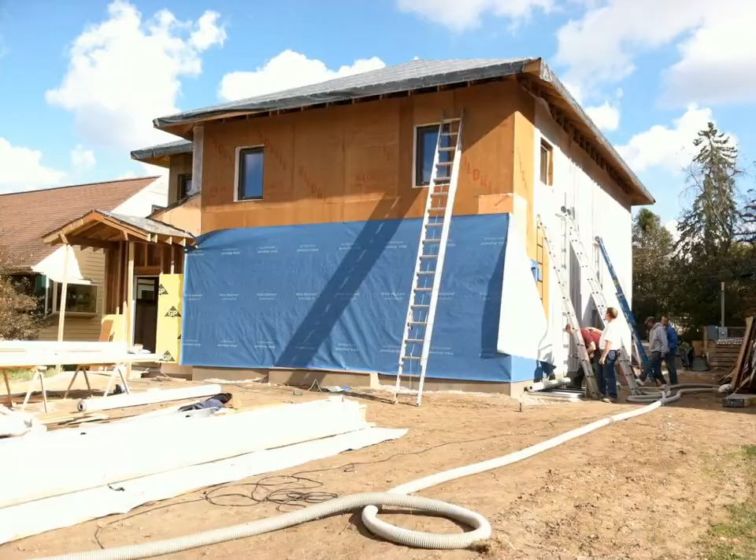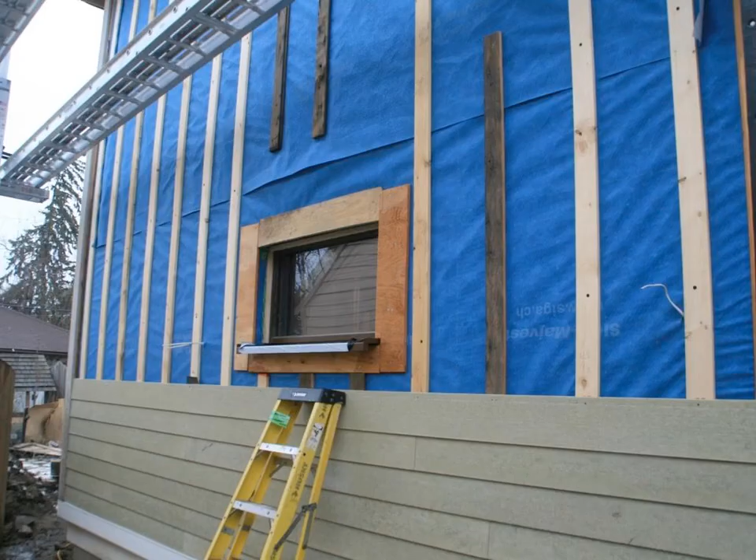Here's a shot of the building with building paper going up. Again, this is a very traditional construction method at this point, and you can see how it's sort of creeping up toward the windows here. We added ventilated siding to the building. We feel that's a best practice no matter what building you make, to maintain moisture management and allow the siding product to last longer. The building was sheathed in HardiePlank and then later painted.

Part of green construction is also recycling, and when you're dealing with an old building, there's lots to recycle. You can see some of the scrap lumber that's now being ripped and used here for furring strips. That's another good way to recycle on the job site.

I should also point out, when you look at the window, you can see the exterior window sill pan at the bottom. It's got tape on it in the front to protect it from getting scratched, but it's essentially the same color as the window. Those are there to channel the water away from the window and away from the building. They're an integral part of the window system used in this project. In this case, these were Optiwin windows from Germany, a high performance product made particularly for these applications.

They offer a solar heat gain coefficient of 50%. Some of their glazing products can go higher, which is great for passive solar heat gain. At the same time, the metric U-value is down in the 0.8 range, which translates to R8 to R10, somewhere thereabouts, for the installed product. Compare that to local double pane product at about R3.5. On the heat gain side, standard windows you buy in this neck of the woods have a solar heat gain coefficient of about 30%, so they let in a lot less of the sun's energy.

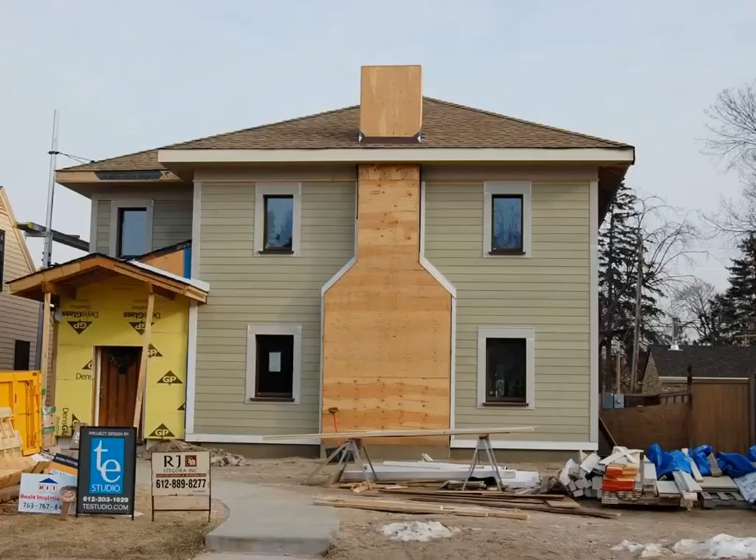Here's a picture of it all coming together, street facade. As I pointed out earlier, the chimney now is a decorative element. The building was originally designed with a metal roof, and that had to be cut due to cost. But the roof is set up to receive a metal roof, and it has full continuous underlayment. So when the shingles are done, the homeowners can put the metal roof on. We're essentially shifting that back the life cycle of one set of shingles to save some cost on day one.

Here's a couple of exterior details, and this is probably no different from standard construction. This building has a fairly ornate window detail. It hints back at the day and age that it was originally built in. You can see it starting to come together here. Maybe I'll pause on this slide for just a second and talk a little bit about cost.

And we could talk about cost on a project like this for an hour easily, but what I can tell you is that the original budget for this was $200,000. And it was clear that that's challenging because so many things were replaced. It was completely rebuilt inside out. We also had a lot of discussion about, is that really worth it? I can tell you that it is worth it.

If you had built a house that size new to that same standard, it would have cost probably $100,000 in excess of what it costs to retrofit it. So while this is a big undertaking, financially speaking, it can be well worth it or cheaper than building new. But it is a big undertaking, and there's really no way to talk your way out of that. This is not cheap.

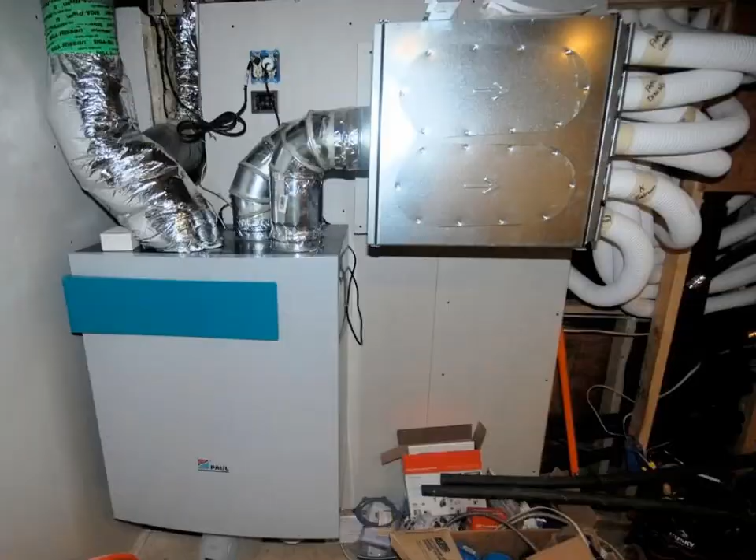A couple of slides here on the mechanical system. This is the ventilator. You saw it in a schematic earlier. That's the actual machine. It's made by a company called Paul, locally sold in the US through Zehnder and their network.

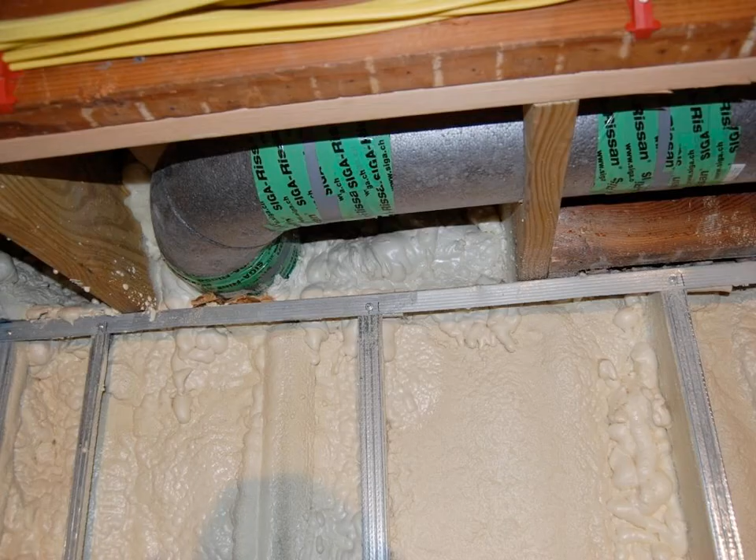Here's just a quick shot of an air supply duct or pipe. We have some of that product floating around here for those of you in the room. You can touch that later. But essentially what that is, is just an insulated duct. And it brings air in from the outside and expels it to the outside. And so instead of making a duct and then insulating it, the insulation is the duct, if that makes sense.

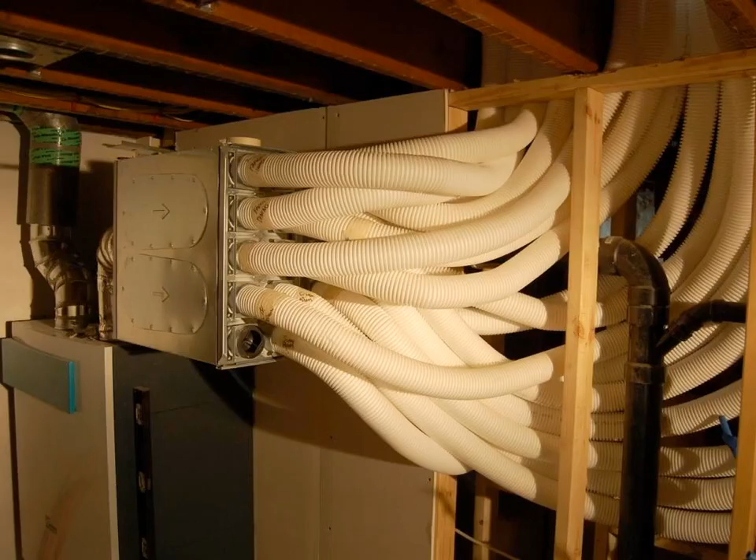You can see all the pipes supplying each individual room in this next slide. Home run system, as I pointed out, they're 3-inch flex ducts. And again, there are a couple of vendors that sell this kind of thing. And it's so simple to install. The homeowner can do it. Paul can testify to it. And I actually can too, because I put one of those in my own house. So if I can do it, you can do it.

So Tim, yes. The reason why piping is so small is because you're not having to heat. That is correct. Push heat through the duct. That's correct. The question was, they can be so small because you're only ventilating, and that's exactly right. You're not heating, you're not cooling, you're just ventilating with the system. The airflow in a building like this is somewhere around 200 cubic meters an hour. What is that, Philip? 120 CFMs. Okay, so for the whole house ventilation. Yeah, I apologize for my metric mind.

Here's a vertical run. One of the things that we did on the architectural design is we created a vertical supply wall, if you want, that is continuous through the entire building. It goes from the basement all the way up, and all the plumbing, heating supply runs, major arteries for electrical, plumbing, you name it, including the ventilation lines, go up and down in that cavity. So that means short runs, and it means you know where this stuff is. It's only in one location.

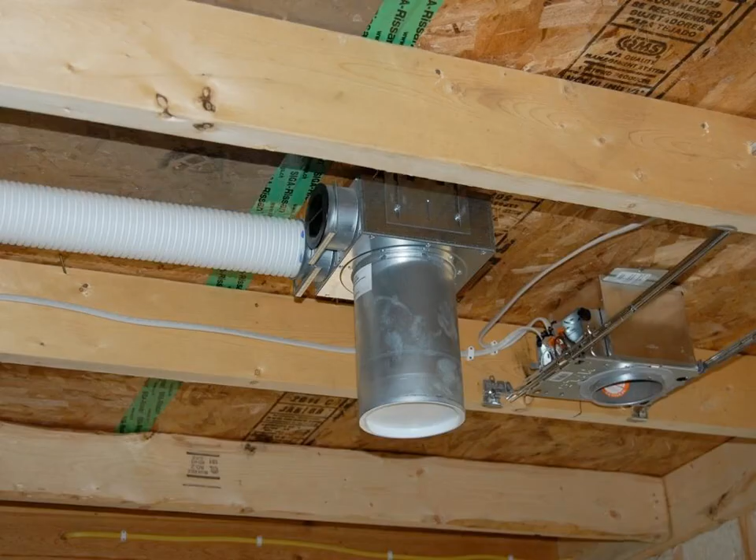Here's the outlet for one of those supplies. And you can see this particular system here goes back to sheet metal, and the sort of pin or nozzle that's pointing down will later be trimmed to the ceiling and then fitted with a diffuser. So that's really all it is.

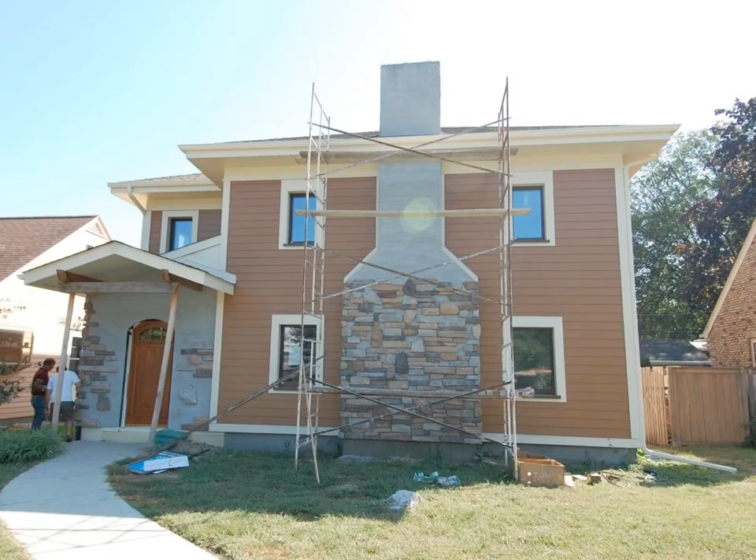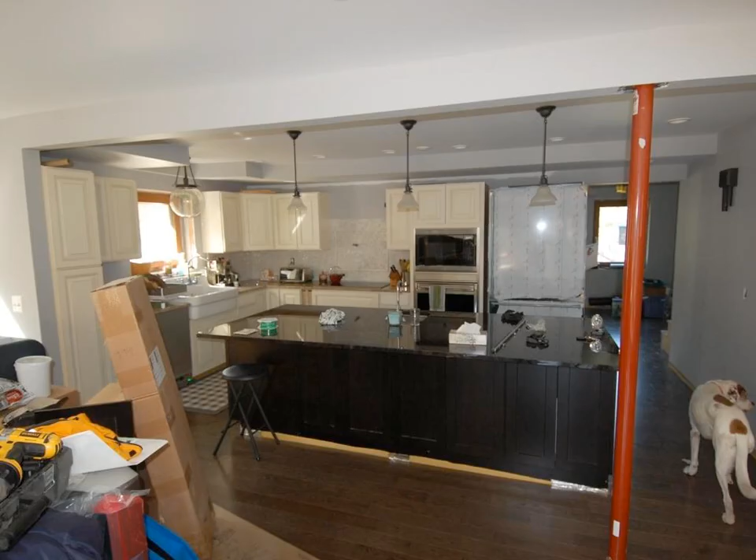Here's an image that we took just a week or so ago. So the homeowners are still chipping away at it. I can't give you the completely finished and final product. This is as good as it gets right now, and they continue to work on it. Here are a couple of interior shots that we took. You can see the living kitchen come to life with a big center island. The structural column here will later be enclosed.

We're looking at it from the addition, living room, dining room. Now, a couple of impressions from the bathrooms. You can see the old trim being recreated. So we have essentially 19th century trim and a 21st century window meet each other there. A couple of impressions here of the nice tile work that's going in.

And air tightness. Oh yeah, the big one. So we just did the blower door test a couple of days ago for the certification. Again, limit is 1.0. We were at 0.87 on the rough-in, and we managed to get it down to 0.65. So not a huge improvement, but enough of an improvement to basically meet the 0.6 air change limit for a passive house, just a little over. But 1.0 was our goal, so we did a lot better than we all thought we would. So it is possible in a retrofit scenario in wood construction to make a building that is this airtight.

For those of you who are geeks, here are the numbers. Specific heat demand, that is the energy that it takes to heat the house. We're heating dominated here, so that's what we look at. If you were in Florida, this would be for cooling. We have a limit of 25 if we want to certify the whole house based on the limit. Currently, the model sits at 24.5, and it was designed to come in at the limit. We didn't want to overbuild it.

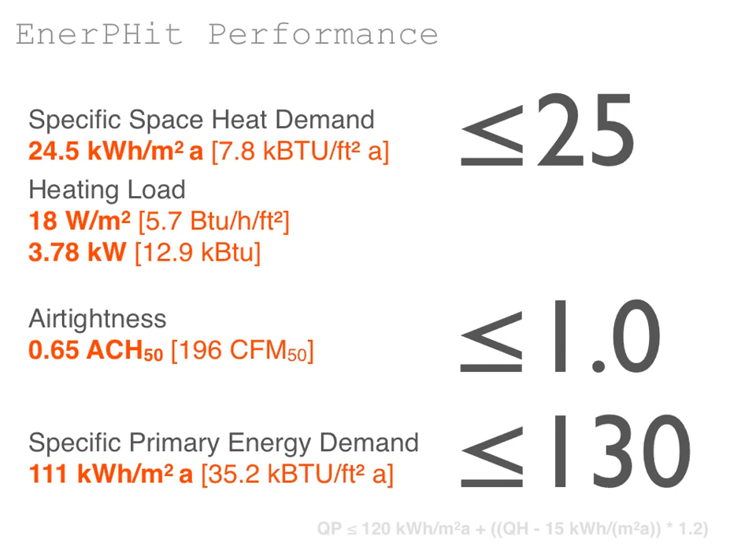The reason why that's okay is because in a retrofit scenario, you get an allowance over the 120 based on where your specific heat demand is. And I'll just leave it at that because that's very detailed for Passive House folks.

So what are we thinking when we do this? Here's the last laundry list, I think. Structure, yes. Weather barrier, I've shown you that. It's all taped up and sealed up. Insulation, I think it's fair to say we have enough. Air tightness, yes. Moisture management comes out of the assemblies and the choices of product that we embedded. Ventilation and air quality coming out of the ventilation equipment, obviously, and that's in there.

Comfort, I would suggest that that is one of the single biggest improvements beyond the architectural improvement in this project. They should not have a problem heating it above 64 degrees on the coldest day of the year. And the interior surface of exterior walls should be within a couple of degrees of the room temperature, making it very cozy. Daylight, we tried where we could. You saw some of the bigger windows. The areas that we controlled, we were able to daylight better.

Durability, really with the products and assemblies that we inserted, we want to get to 50-year life cycle on the major components, certainly 100-year life for the building itself, given where it's at right now. You know as well as I do that every bit of equipment has a different life cycle, but the windows are one of the bigger components here that play a role, and we feel that that's a 50-year product. The mechanical equipment may not quite live up to that, but then again, it never does, and that doesn't change in this paradigm. But 50 to 100-year life cycle is certainly what we designed this for.

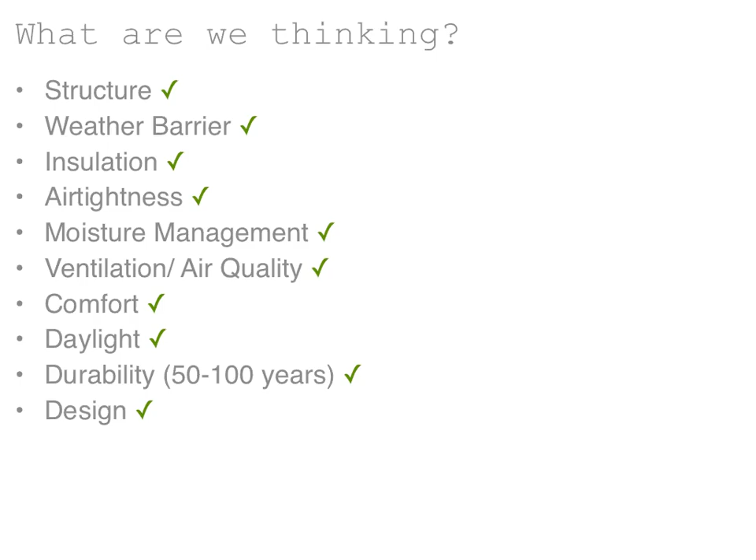Design, you know, the homeowners love it. I think it fits well within the neighborhood. If you haven't been there, you can drive by if you're local here and be the judge of that, but we try to be respectful of where it is and what it is.

Life cycle cost, we didn't touch on that quite as much, but obviously beyond your initial investment, there is a significant change in now owning a building like this. It starts with the utility cost being dramatically lower, and it extends through the maintenance cost. Because the assemblies were carefully chosen and quality product was installed in a quality manner, you extend the shelf life and the maintenance cycle of a lot of the building systems.

And even just an extension by a factor of 2 is a significant reduction when you look at owning a building 30, 40, 50 years. And if you know you like where you are, and if you're building an asset for your family, then you may be concerned with those implications down the line. So really, part of this is really to look at life cycle cost.

And another point I want to make is that if you invest $200,000 in a retrofit like that, what's important here is you haven't invested $200,000 in the Passive House upgrade, because this building would have received a remodel and an addition anyways. And I think Ryan would probably agree with me that somewhere between $150,000 to $200,000 would have been a standard local retrofit project.

So we're somewhere between 200 and 300 with the unknowns of some of the sweat equity and the sponsorship in that bracket. So there is an upcharge going to this that produces a significant return on the flip side, but it doesn't account for the entire cost of the project. It's probably clear to all of you listening, but what I find is if I don't say it, people take away, oh, just because it's a Passive House, it costs 300 grand.

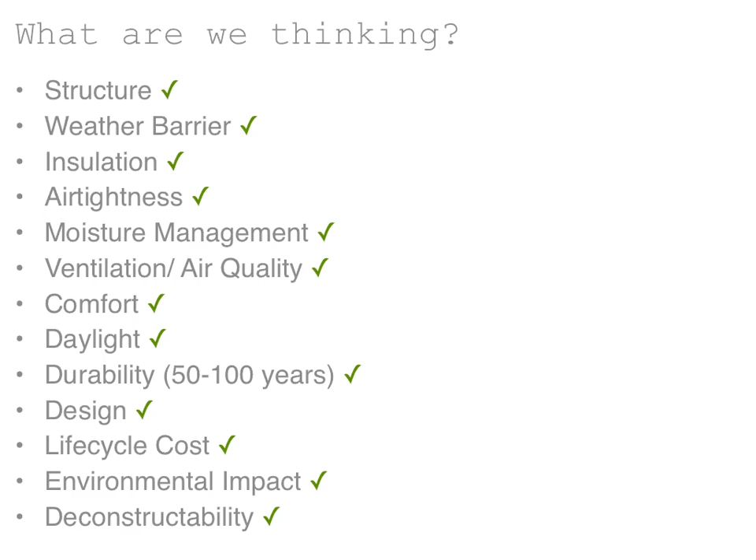And deconstructability, I mentioned it a couple of times throughout. I think we're on a finite planet with finite resources, so we do have to look at where the resources of the future come from. And I think we're already at a point where if you're deconstructing a home, most of that ends up being used as something again. So we're already recycling existing buildings now, and we have to keep that in mind when we make new assemblies. So that's what we call the holistic approach.

And these are the guys that we did that for, and that did a lot of the work, frankly. And so my thanks goes to them for enabling that and allowing us to do the work that we do. And I'll close there for now.

All right. Questions? Yeah. Did you ventilate the attic? Yes. The question was, did we ventilate the attic? And yes, we did. The attic is fully ventilated through the soffit, air intake all the way around, and it's a hip roof, so that's very easy to do, with a ridge vent at the top. And on the sides, at the energy heel, where the insulation would sort of fill those cavities, we install vent chutes. So there's a vent chute that allows that air to come in through the soffit, through the insulation layer, and then exit out the top.

So nothing outside of what the code requires at this time? You didn't have to do a variance or anything? No, on this project, there isn't a variance or any sort of code related issue. The only issue, if anything, that came up during the project was that the house sat too close to the neighbor's lot line on the north. And the north wall, I didn't get into that in detail, but one wall we actually had to build in rather than out.

Yeah. And just to sort of complete that story, on this particular project, there are 3 different slab conditions, 3 different below grade wall assemblies, and 3 different above grade wall assemblies beyond the basic setup that I showed you. And they're all in response to individual conditions that we had to deal with that we couldn't make go away.